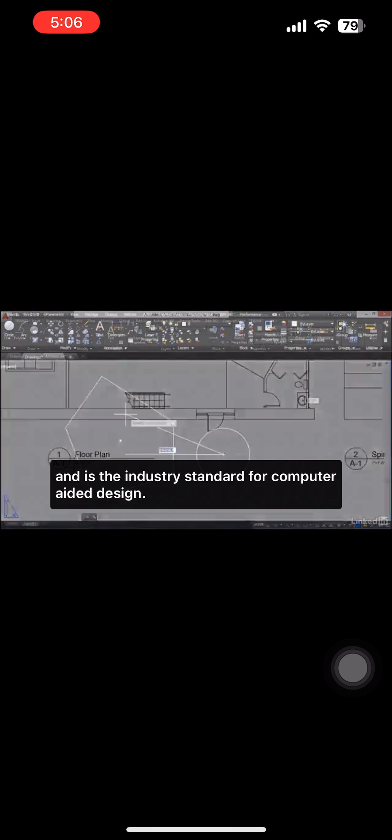AutoCAD has been around for over 30 years and is the industry standard for computer-aided design. People use AutoCAD in many different professions and disciplines.

In this course, we will start at the beginning, drawing lines, rectangles, circles, and other geometric objects. We will then learn many tools to manipulate these objects and control their visibility. You will gain experience in practice projects. You'll add to your knowledge step by step with topics such as hatching, dimensioning, annotation, attributes, tables, external references, layouts, and creating output. We'll cover all of these tools and more. So let's get started with AutoCAD 2016 Essential Training.

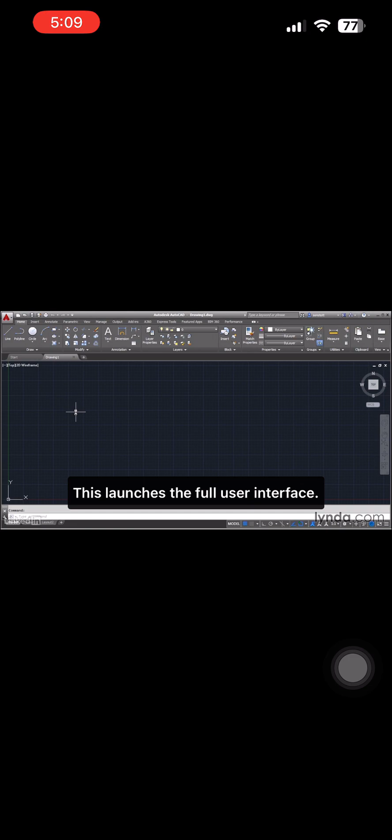At the top, we have what is called the Application menu. Click to open, and move the cursor over these items without clicking. You'll see that they automatically change, and you have items you can choose over here on the right.

There's a search bar up here where you can type in command names. So for example, let's say you've heard of the command fillet, but you don't know where it is in the interface. This will give you information about where to find it. There are actually two different versions of fillet: one's a 2D version, and there's a 3D version down here.

So for example, let's say I want to find this command in the interface. It's on Ribbon tab Home, the Modify panel, and it's in a chamfer and fillet dropdown. Let's see if we can find that. This is the Ribbon tab Home, this is the Modify panel, and this is the fillet and chamfer dropdown.

If you hold the cursor over a command, you'll see its tooltip, which gives you more information. Some panels can be expanded like this one, shown with a downward facing arrow. That means there are more commands available, each one with its own tooltip. There are many tabs on the ribbon, and some of them have drop downs, and you can just go through here and examine how some of the content is organized.

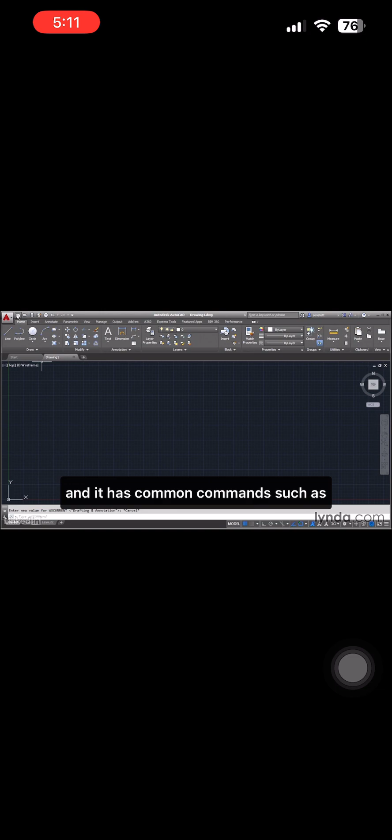Continuing on with our tour, this top area is called the Quick Access toolbar, and it has common commands such as new, open, save, save as, plot, undo, and redo. You can add or subtract items from this menu using this drop-down. Say I want to add workspace to the list.

That will give me this drop-down menu, which allows me to change workspaces up here as well. Here you can type in command names or phrases to search for them in AutoCAD's help system. Over here, this shows my user account on A360.

This is how you can access apps that work within AutoCAD to extend the functionality of the program. Over here, you can access Autodesk's online community, and this is a link to the help system.

Of course, over here we have the standard Windows controls for the entire application and a corresponding set of Windows controls for the current drawing. This whole area is called the drawing window.

This element is called the view cube, and it helps you navigate in three-dimensional space. The navigation bar contains a list of common navigation commands that are used both in 2D and in 3D work.

These are the in-canvas controls, and they're actually menus. You can open them just by clicking on the word.

You can also right-click to open the context menu, and the information displayed in this menu depends upon the context in which you are clicking. So if I right-click up here, I'm going to get a different menu. If I right-click here, I'm going to get a different menu. You see? It's context sensitive.

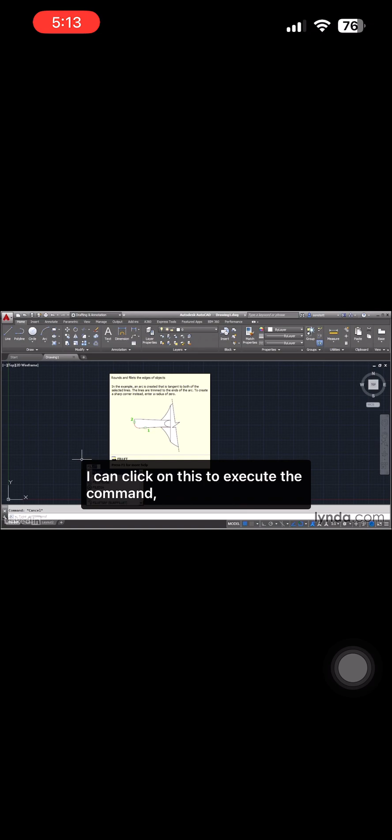I can click on this to execute the command, and now it's running on the command line. You see the prompt here and some options. I don't want to dive in too far in this first video, so let's cancel out by pressing escape.

Down here we have model and layout tabs. I'll click on layout 1 to go to this virtual sheet of paper, which is where I would lay out the drawing for plotting. You can also hover the cursor over the File tab to go to the different layouts or to go back to model space.

Alternatively, you can just click these tabs down below. They do the same thing.

Finally, over here in the lower right of the interface, you'll find the status bar toggles. They're on when they're blue and off when they're gray. And each status bar toggle has its own menu.

You can access that by right-clicking. This goes to a dialog box. This one opens up a menu instead. Each one is different. You can also add or subtract items from this menu by using this rightmost button called Customization.

Here you can add, let's say, line weight, and you see that when I toggle that on and off, it's adding this element right here that allows me to show or hide the line weight. I'll just turn that off again.

This completes our tour of AutoCAD 2016's user interface.

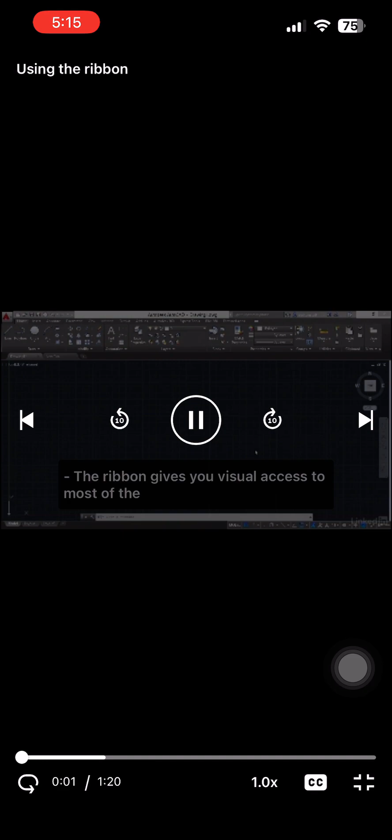The ribbon gives you visual access to most of the commands used in AutoCAD. In this video, you'll see how to customize its appearance using the ribbon's 3 modes. So the ribbon is organized into tabs, panels, and commands.

You can display this information in different ways using this control right here. Click on it one time, and you will change the panels into these icons. You can go to another tab, and then hold the cursor over the draw icon, and you'll see all of the commands on its panel appear right here.

If I click this button again, we'll minimize to panel titles. So this saves room on the screen. I can then position the cursor over the word draw, and I see that same panel.

I'll click on it one more time, and we'll go to the most minimalistic view where we simply see the tabs. I'll click on the tab, and that opens the full ribbon temporarily, so I could select a tool, click on line, and start drawing a line. But when I do that, the interface disappears.

Click on it one more time to cycle back to the full ribbon, and that keeps the ribbon on screen all the time. And that's the way I'm going to be working in this course. In the next video, you'll learn about changing workspaces.

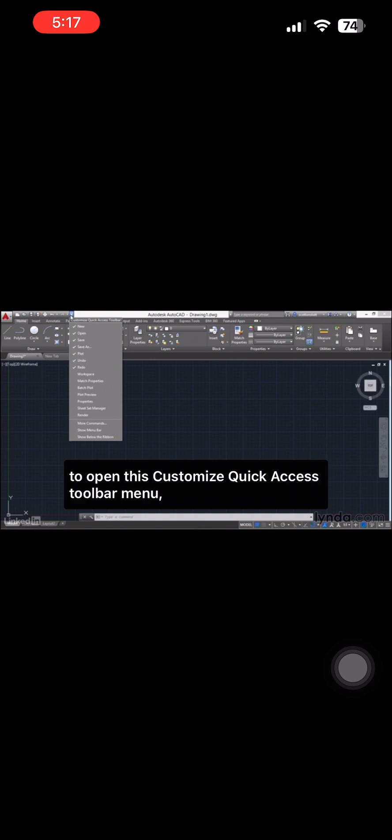Click this downward-facing arrow to open the Customize Quick Access toolbar menu, and then choose Workspace. This adds a new drop-down to the toolbar. I can then open it and select 3D Basics.

This changes the content of the ribbon. It gives me a few 3D modeling tools here on the Create panel, and some Boolean tools on the Edit panel. I still have some of the drawing tools available here and modification tools here, and those were available in the original workspace. But things are rearranged here according to the task at hand. So if I want to do a little 3D modeling, I might just switch to this workspace. It's not necessary, but it makes things a little quicker and easier to find.

AutoCAD is fundamentally based on commands. So if you remember the command name, you can type it in. But if you've forgotten the name or remember it by its icon, you can find it visually in the ribbon.

Another way of accessing workspaces is down here on the Customization button. Click that on the status bar and choose Workspace Switching if it's not already selected. Then click this gear icon to open a pop-up. Here are those same three workspaces that ship with AutoCAD. I'll click Drafting and Annotation to switch back here, and the Design Feed palette opens up.

I'm going to close that by clicking its X icon right here. Now, every time I switch back to this workspace, that palette is going to appear because it's saved in the workspace itself. I'd like to turn that off on a more permanent basis and only call for it when I need it. And to do that, I'm going to open up the Workspace menu and select Workspace Settings.

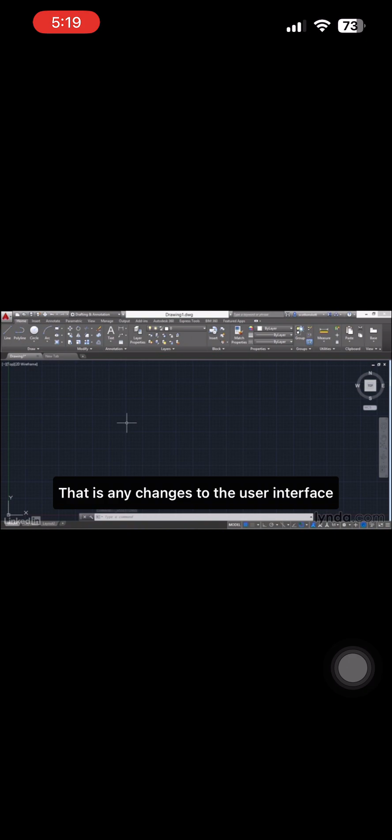Here you have the option of whether or not you want to save changes to your workspaces. You have to choose this radio button if you want to save the changes and click OK. Just be warned that anything you do now is going to be recorded in that workspace. That is, any changes to the user interface will be saved in the workspace.

So if I now switch to 3D Basics and then switch back to Drafting and Annotation, that will leave the Design Feed palette closed. It doesn't reopen it like it did initially.

Now let's say I want to pull up that palette. I can just type it in. I'll start typing Design Feed, and as I do that, watch what happens. DES, and autocomplete narrows down the commands that are available as you go ahead and type. So I want to reopen that by using Design Feed Open. I'll just press Enter now, and sure enough, that opens the palette.

I can close it with a close box. You can also go to the View tab, which is present in every workspace, and here you can toggle on various user interface elements or turn them off. I'll toggle off the navigation bar, the view cube, and the UCS icon. I'll also toggle off the layout tabs because the same functionality is available on the file tabs here. Just by holding the cursor still over a file tab, you have access to model and the layouts.

This is just my personal preference on how I like to have my workspace cleaned up so I don't have extra user interface elements on the screen. But as you can see, AutoCAD is highly customizable, so you can adapt it to the way that you like to work and the types of things that you're doing. In the next video, I'll show you how to get into the nuts and bolts of how to customize AutoCAD's user interface.

In this video, we will relocate a command on a panel to get a sense of how far you can take customizing the user interface. In the Drafting and Annotation workspace, go to the Home tab and then click on the word Draw here to open this slide out. This reveals additional tools.

This command right here is multiple points, and the command that you would type on the command line is shown at the bottom of this tooltip. It's point. I'd like that command to appear to the left of the line command here in a large icon form. Let's take a look at that.

Type in CUI for Customize the User Interface and press Enter. That opens up this large, potentially intimidating dialog, but I'm just going to give you a quick tour of this and just give you a sense of what's possible.

I'll go into the ribbon here in the hierarchical tree and open up Panels and scroll down and locate Home 2D Draw. Open that and then open up row 1 and row 2. So we have this listing which corresponds to what we see over here.

I want to move multiple points up into row 1. So basically I want to move this command over here. So I do that by dragging this up in this hierarchy and dropping it right above the line command, right there. And now the icon appears in a new location.

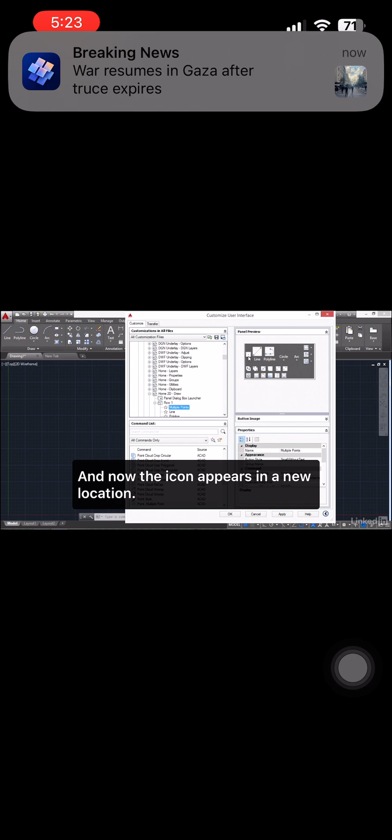However, it's too small. So we can change its property right here. The button style, I'll open this up and choose large with text vertical. And there we have it. Now it says multiple points. However, multiple points kind of takes up too much space.

So I'm going to remove the word multiple and just say points. And then I'll click Apply and OK. And in a few moments, the change will take effect. There we have it. Now it says points and line. So we've successfully customized the user interface.

So I don't really recommend that you go changing everything right in the beginning, but I just want to give you a taste of what's possible and how you can customize AutoCAD to suit just about any purpose that you have to use the software. In the next video, I'll show you how to edit command aliases.

Most commonly used commands have command aliases or abbreviations you can use on the keyboard. For example, you can type REC instead of the full word rectangle to save time typing. In this video, you will edit a command alias using the alias editor built into AutoCAD.

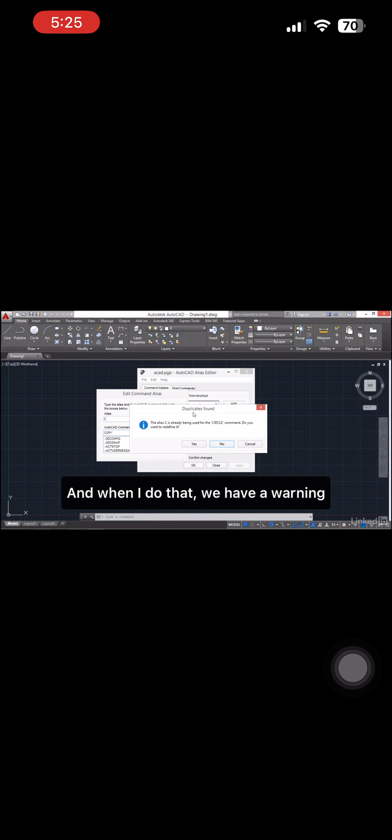OK. And when I do that, we have a warning because there's a duplicate. The alias C is already being used for the circle command. Do I want to redefine it? In this case, yes, because I copy things more than I draw circles. So when I do draw a circle, I don't mind typing CI. So I'll say yes. The alias C now refers to copy.

Great. Let's go back in the alias editor one more time. So I'll just press Enter to repeat the previous command. And that just brings it right back up. And then I'm going to scroll down this list until I find circle. And right now it's also C, which is potentially a source of a problem. So I'm going to edit that and make that say CI so we don't have a conflict.

OK. And then I'll click Apply. I'm going to overwrite this file, and you can see where it's located here in this long path. And alternatively, you can edit that file using Notepad or some other text editor. Just make sure you don't save it with any formatting. It's just a simple text file. I'll say OK and OK again.

Lots of OKs here. And I've experienced this a few times where AutoCAD thinks that it's crashed. You just cancel this. It's actually fine. Now I'm going to type C, and it says circle. Seemingly didn't work, but I think what we need to do is close out of the application and relaunch it. And then our aliases will take effect.

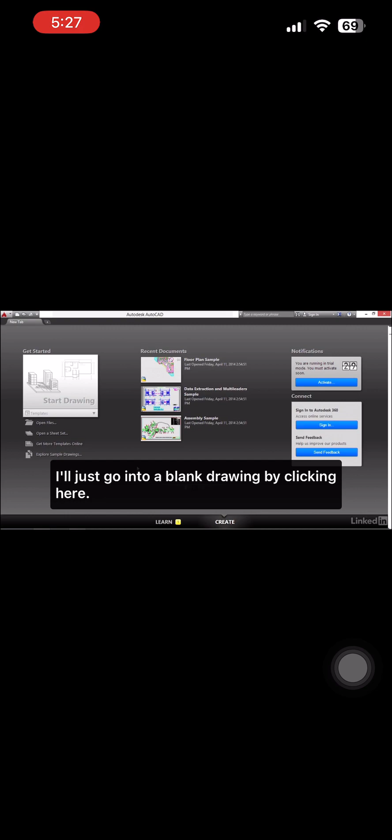Okay, I've relaunched AutoCAD. I'll just go into a blank drawing by clicking here. And then I will type C and see how the autocomplete now says C is copy. Also, CI is circle. So you can use this method of using alias edit to change the abbreviations you use for your most frequently accessed commands.

In this video, I'll show you how to access help, which is built into AutoCAD. The great thing about help is you can get lots of specific information, but the problem is you have to kind of know what you need to find out, and that can be a problem.

So if you know the command that you are having trouble with, then you can look it up. But if you're not sure what command to use, then that's another story. So right up here, there's a search engine that you can use to query AutoCAD's built-in help system.

So if I want to type in the word circle and then press enter, it will automatically open the page about circles. And you can then go to the circle command itself and read about its prompts and so on. This is really most useful when you want to look up a specific piece of information about an option that you just aren't quite understanding. But again, it's really only very limited in its usefulness because you have to know exactly what you're looking for.

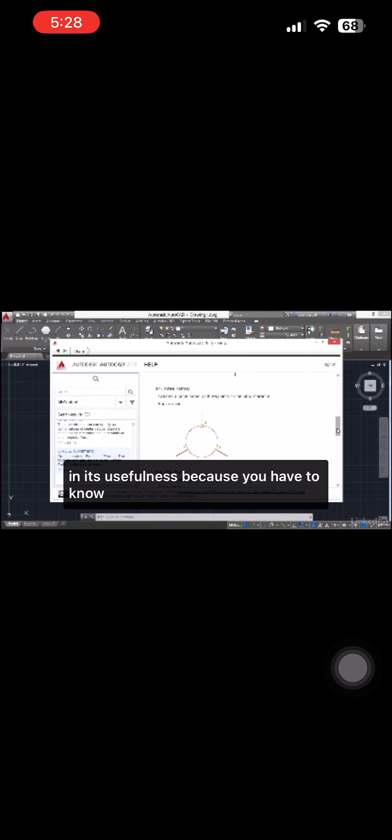You can also get there just by typing the question mark. It's its own command, question mark, enter. It opens the help just the same. You can also, if you do it this way, filter the results so that you can get content just for a user, or if you're writing your own programs, you can get information for developers. So I just want to know how to use the rectangle command, and I can type that in here

and get some information. In this video, you accessed product documentation and are able to access videos that ship with AutoCAD through this help system.

In this video, I'll show you a few tricks for saving, backing up, and recovering damaged files. Let's go ahead and open a few files to get started here. Go up to the Open icon on the Quick Access toolbar and navigate to the Chapter 2 folder. Let's open Plumbing, Mechanical, and the Architectural Imperial Units drawing file. So to select them, I'm going to hold down the Control key and select those three items. Click Open, and they will appear here on different file tabs. You can take a look.

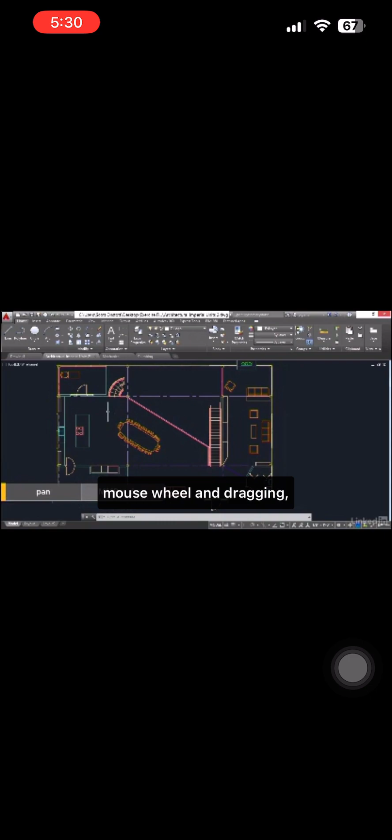Now, if I make another change, say I pan the drawing by holding down the mouse wheel and dragging, you'll see that a little asterisk appears after the file name to indicate that the file has changed. You could now save it. I could either click this icon up here to do that, or type QSave, or the keyboard shortcut QS. Also, you can press Control-S, so there's many different ways to do this. My favorite is just to type QS and press the spacebar with my thumb. That seems to be the fastest for me.

AutoCAD will also automatically save the file after a few minutes, and you can control how long that is in the options. So let's go to the Application menu and click on Options and take a look at that. Under Open and Save, right down here, you can choose to automatically save a copy of your drawing every 10 minutes or however many minutes you want. I find this to be a little bit disruptive because I can be working and then all of a sudden AutoCAD will pause for a second while it's saving a large file. I find this to be a little bit annoying, so I usually turn this off. But alternatively, you could increase the save interval to something like every half an hour, and maybe it wouldn't get in your way as much.

You can also optionally create a backup copy of every file, and I have that on. So let me show you what happens when I save this. I'm going to press Control-S to save, and I'll go over to the Windows Explorer, take a look at the file system here, and see what's happened on disk. So I have a new file, Architectural Imperial Units 2, that was created when I used Save As. And then the backup file was generated when I just typed QS.

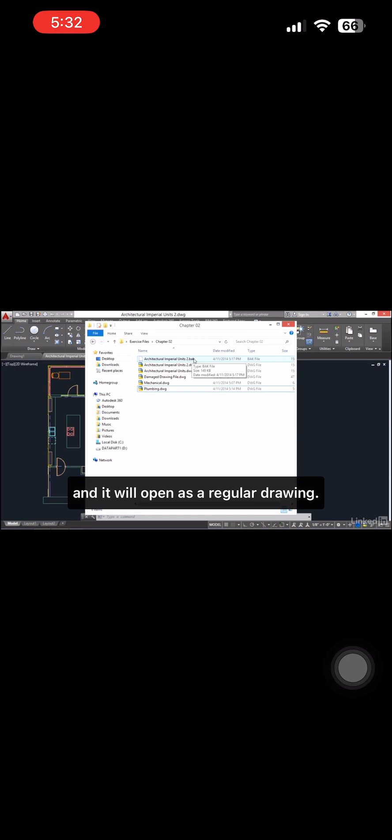If you need to use this file, let's say this one gets corrupted or deleted, you just have to rename the file extension to DWG, and it will open as a regular drawing. This can be handy because you're doubly protected, but it takes up twice as much space on disk. So for that reason, I tend not to use this method. So if you don't want to automatically create a backup, you can go back to Options, and you can do that quickly by typing OP, Enter, and just turn off the backup file creation and the autosave feature.

Of course, then you're running the risk of losing everything, but we still have yet another form of backup available to us through Autodesk 360. But that's only available if you sign in up here to the service. And then every time you save, a copy will be uploaded to the cloud.

In some cases, you might need to recover a damaged drawing. There's a special command for that called recover. I'm going to type that in. Recover, enter, and I will select this damaged drawing file, open. It's taking a while to think about this and to analyze all of the objects in the drawing. And now it's found 2 errors. Who knows what they were, but thankfully they were fixed. So I can say close.

If you experience some strange behavior in the program where a line, you know it exists, but it doesn't show up, for example, you can try recovering the file, and it might correct any error. Now this is rare. This only happens in big project files that take a lot of memory. So I just want to point this out so you have another technique to save your data. In the next video, you'll learn how to set the drawing units.

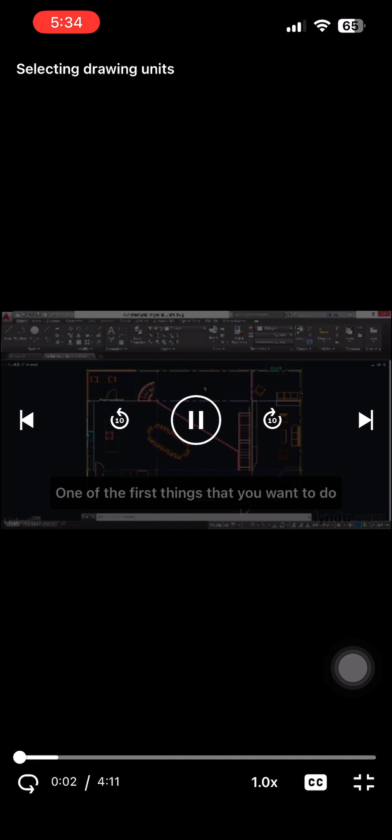In this video, I'll discuss units. One of the first things that you want to do before you get started drawing is select a system of units. Open the Architectural Imperial Units sample file from the Chapter 2 folder, and then type UN, enter for units. This drawing is currently set to architectural, which means the foot and inch system. The symbol of inches is the double quote here. The symbol for feet is this single quote. They're both on the same key next to the Enter key on the keyboard.

You don't actually have to ever type in the inch symbol because AutoCAD is going to interpret a number like 18 as 18 inches. You could alternatively enter that as 1 foot 6. That's one single quote 6, and AutoCAD will interpret that as 18 inches, just the same. You also have these other choices for units. So let's say I was using the metric system. I would select decimal units in that case. Engineering units are actually based on feet and inches, but they use decimals. So if I wanted to say 18 inches in engineering units, I would say 1.5 feet.

Fractional units are inches only, no feet, and these are used by cabinet makers, for example. Instead of saying 5 feet, they would just say 60. Scientific units have exponential notation, and these can be in any type of unit that you want. It could be parsecs for astronomers or angstroms for circuit designers or something. You just type E to indicate powers of 10.

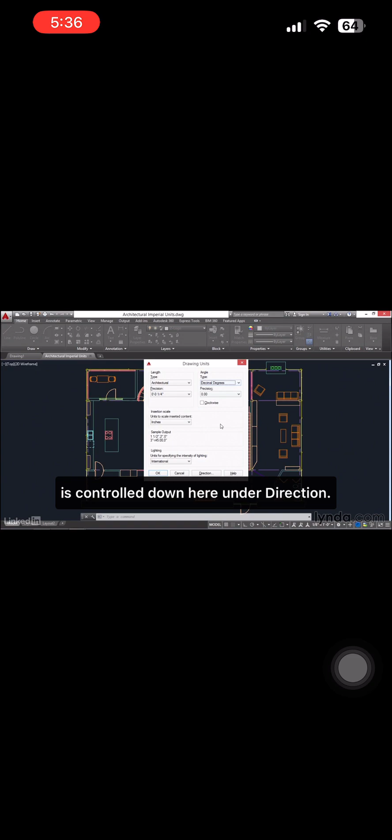The way that you measure angles is controlled down here under direction. The default in AutoCAD is east is 0 degrees. So going to the right is 0 degrees. Going straight up then would be 90 degrees. So the system works in a counterclockwise fashion by default. You could change that so that north was the base angle, and then 0 degrees would be straight up. And that's typically the direction that you want for surveyor's units. I'll leave this set to east. Again, you can set the precision for the angular measure, and you can check here if you want it to go the other way so that angles are measured clockwise rather than counterclockwise.

When you create blocks, you have to choose what units they're using. So here's where you can select which units you want blocks to be converted into. So because I'm using architectural units, it makes sense to leave this as inches. If I was using decimal units, I could then change this to be centimeters or millimeters. Down here, you have choices for lighting, international, American, or generic. I'll go with American, inches, and architectural.

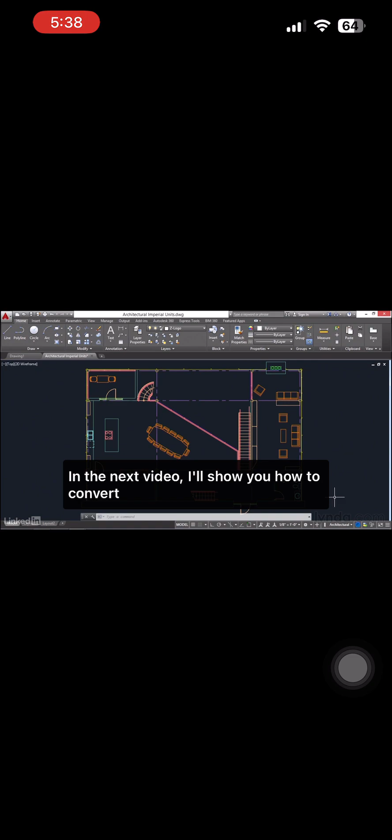Down here on the status bar, you have the ability to add units as a special choice. However, it only lets you select one of these 5 systems. It doesn't give you any other choices. So I really don't recommend that you do it this way, because then you can't control the precision or the angular units or anything else. In the next video, I'll show you how to convert a drawing from one system of units to another.

In this video, I'll show you how to convert a drawing from one system of units to another. We will convert from feet and inches to centimeters and back again. Go ahead and open the Architectural Imperial Units sample file from the Chapter 2 folder.

Before we change anything, I'd like to measure a distance in the plan. And I need to measure something that I already know the distance of. So I could measure, let's say, this sofa here. It's probably about 8 feet long or so. Let's just verify that by using this tool, Measure. I'll click on this icon,

and then I'll click near the sofa, right about here and right about here. And you can see interactively the distance there. It's actually close to 6 feet. So let's just keep that in mind. I'll press Escape to cancel out of that command.

Now I'm going to change the units. So I'll type UN, enter, and change the type from architectural to decimal. And then I'll set the precision to be 0.0. Also, when you're changing units, it makes sense to change the insertion scale, but this is different than the drawing units. This is the scale that you're going to insert blocks at, and we'll learn about blocks later, but this is different than the drawing units.

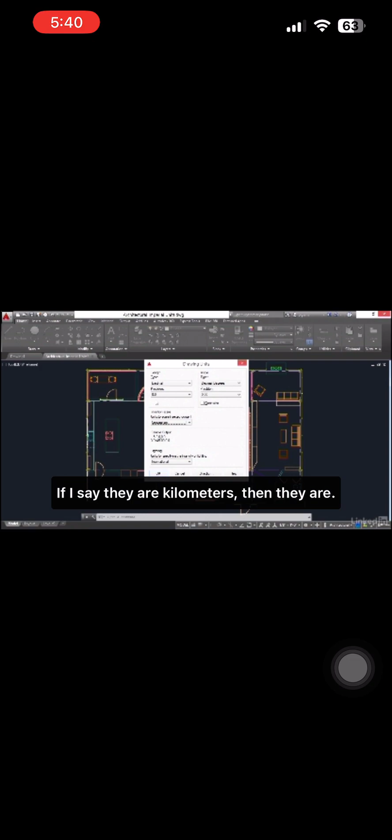The units are really what you say they are in your mind. So if I say these are millimeters, then they are. If I say they are kilometers, then they are. It really depends on what you're drawing. So in this case, because it's architecture, I'm going to say that 1 unit is 1 centimeter. I'll click OK. And the units have changed, but the drawing has not.

Let's go ahead and measure that again. And I'll click 2 points about here and here. And it looks like it's about 72 units. So that would be 72 inches, really, because that's 6 feet. So the drawing still has another missing piece, and that is the scale. So it's really not enough just to change the units. You also have to scale the drawing to really convert it from one system of units to the other.

So to do that, I'm going to use the scale command, which is located right here on the Modify panel. I'll click that icon, and now it says Select Objects. Just as a shortcut, I'm going to type all, A-L-L, enter. It gets everything for sure. And it still says select objects because I can keep selecting more things, but I'm just going to go ahead and press enter again to get out of that mode.

Now it says specify base point. You can see that by the cursor and also down here on the command line. The base point should be at the origin point of the coordinate system, which is 0, 0, 0 in x and 0 in y. So I'll type 0, press the tab key to go over to the y coordinate and press 0 again, and then enter.

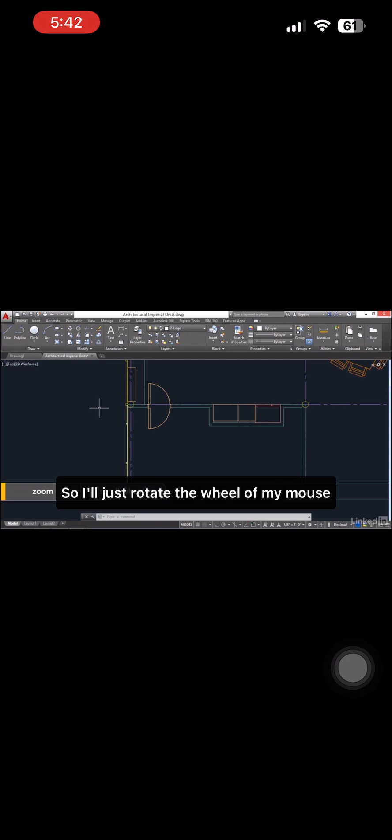So I'll just rotate the wheel of my mouse, and then I will drag the wheel to pan, like that. And again, I'm going to measure this sofa over here. Now it's about 180 something, so it's much bigger, and that makes sense for centimeters. It's almost 2 meters long now. So this is like a reality check I always like to do. Does it make sense? Yes, it does. Okay, it looks like I've successfully converted the units.

Okay, now let's say we want to go back. We're starting with this metric drawing, and we want to go back to imperial. So again, we have to change the units to the values they were before, architectural and inches here. Okay. And now I need to scale it in reverse. So how do you do that? It's a little bit more complicated, but not much.

Again, you do scale, select objects, we'll type all, enter, and then enter again to get out of select mode. And then the base point, I'll type 0, tab, 0, enter. The scale factor, this time, I don't know. I don't have a calculator to calculate 1 divided by 2.54, but I'm sitting in front of a computer that has that function built into it. So I can ask AutoCAD to figure that out for me.

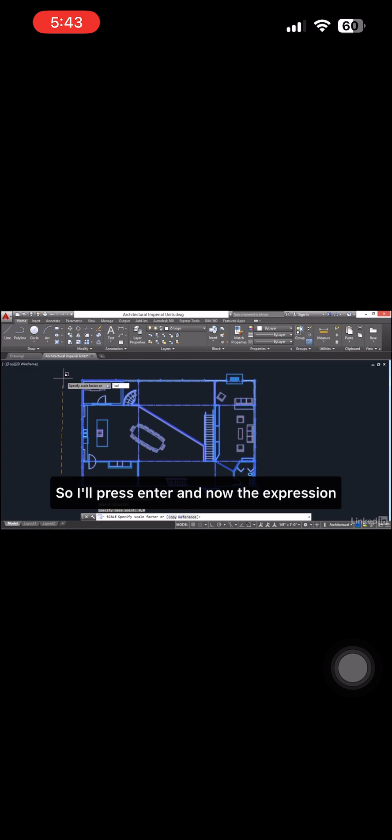So to do that, I'm going to type apostrophe CAL. That means use a calculator transparently on top of this command. So I'll press enter. And now the expression is going to be 1/2.54. That means 1 divided by 2.54. That's my conversion factor. I'll press enter, and everything got smaller.

Let's just go ahead and verify the size of that sofa now. I'll use the measure command again. I'll click 2 points here, and it looks like it's about 6 feet. So we did it correctly. So there you have it. The way to convert a drawing from one system of units to another involves more than the units command. You also must scale the drawing.

In this video, I'll discuss some program options and their scope. To understand what I mean, let's just dive right in. Open the mechanical sample file in the Chapter 2 folder and type OP Enter for options. Go to the Display tab here. Let's change an option that has global scope, that is, an option that affects the program as a whole. I'll change the color scheme from dark to light and click OK.

This option remains active no matter which drawing you're in. Go ahead and open the plumbing sample file in the Chapter 2 folder. Sure enough, the interface remains light. I can go back into options and change that back to dark. I actually prefer dark because it gives you less eye strain.

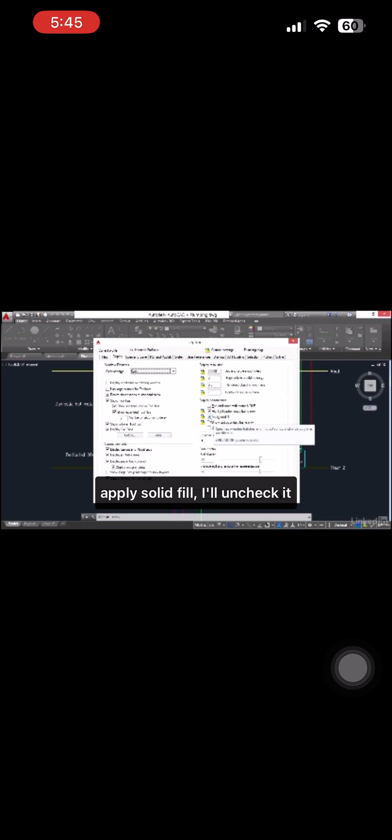I'll click apply. Now, some of the options have this symbol next to them, and it means the current drawing. So if I change this option, for example, apply solid fill, I'll uncheck it, and that's going to be specific to the drawing. That means it has drawing scope. I'll click OK. And in this case, this particular option is visible after we regenerate the drawing database.

And so we just type in RE for regen and press enter. And when everything is regenerated or recalculated, if you will, the fill inside these plumbing objects disappears. This option is specific to this drawing. If I go over to the mechanical drawing, I can go ahead and check out the options again, and you'll see that yes, this is selected here. So it's specific to the drawing.

So you have two flavors of options, the options that affect the whole program and the ones that affect specific drawings. And you can tell them apart simply by using that icon in the options dialog box. In the next video, you'll learn about drawing templates and how you can use them to create new drawings.

In this video, I'll show you how to create a template so that you can pass along drawing-specific settings into future drawings that you create. Go ahead and click New, and you're prompted to select a template file. Select the standard acad.dwt file. T is for template. Incidentally, this folder is located deeply in the hierarchy of the user profile. I'm going to open this particular template, and that creates a new drawing, drawing 6.

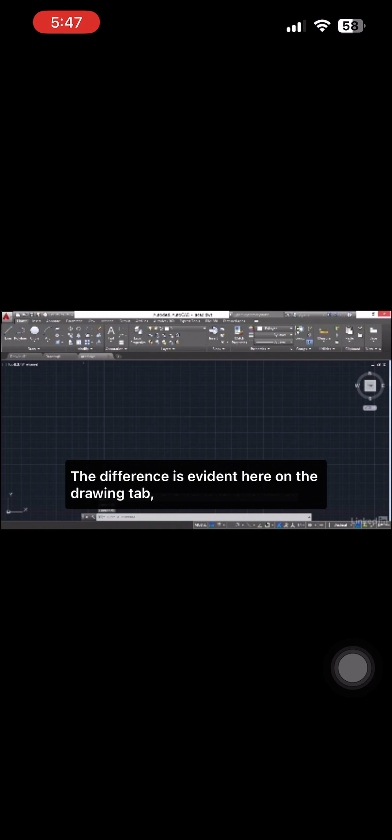If we want to alter the template, we have to access it in a different way. We'll go to Open, and then choose Files of Type DWT from this drop-down. That takes us to that same folder where we can open that template file. The difference is evident here on the Drawing tab. We see ACAD DWT, and the previous one said Drawing 6. So now we know that we're actually in the template.

Let's go ahead and turn off the grid and toggle off the UCS icon by going to the View tab of the ribbon. I would also like to turn off the View cube and go to the Home tab. And just so that you really understand how templates work, I'm going to create a circle right here in the middle of this space. I'm doing that just to demonstrate this point, but you normally wouldn't create a circle in your template. This is just to show you that this information is passed on to the next drawing.

Let's go ahead and save this with a unique name. So click Save As and rename this mytemplate.dwt. Save, and you can type in an optional description here.

No grid, no UCS icon. Okay, so we've saved the template, let's go ahead and close it. Now let's create a new drawing using the template.

Click New, select My Template, and click OK. Open. Drawing 7 was created with the circle. Notice that there's no grid and no UCS icon.

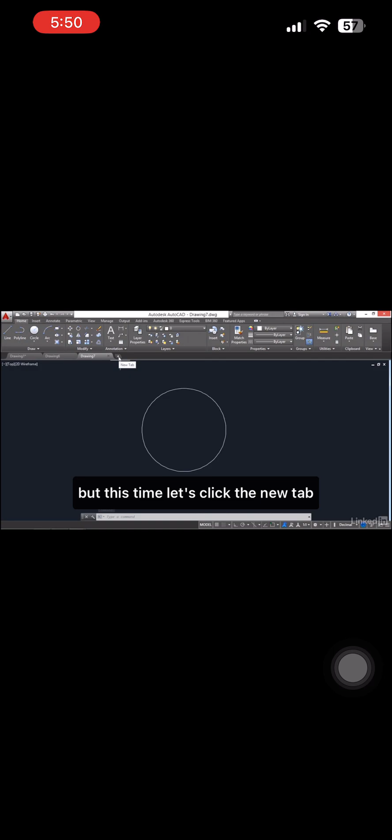Just to test it out, we will create a new drawing, but this time let's click the New tab, and we can access the template in an alternative way right here by expanding the templates area, scrolling down, and choosing mytemplate.dwt. It created a new drawing called Drawing 8 that has those specific settings set up so that now you're ready to create a new drawing. So in this video, you learned the ins and outs of templates, and you created your own template.

In this video, you will pan to change your point of view in a drawing. Open the architectural sample file in the Chapter 3 folder to begin. Pan is perhaps the simplest of all commands.

It doesn't have any options. I'll show you the formal method of using this command first, and then I'll show you a shortcut, which I prefer. So the pan command can be executed simply by typing P, enter. The cursor changes to this hand symbol. Click and hold the left mouse button and drag to pan.

When you're panning, what's happening is you're changing your point of view, you're not actually moving the geometry in space. It's an important distinction. If you wanted to move geometry in space, you would use the move command. Here we're transforming the entire drawing, if you will, because we're actually moving our camera that we're viewing the drawing through. So I'm just panning, looking at different things.

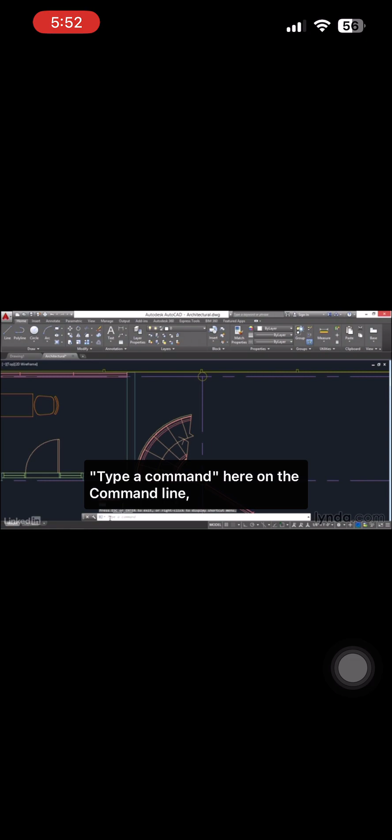It's very intuitive. Notice down here, right above the command line, it says press escape or enter to exit, or right-click to display shortcut menu. So there's 3 options listed here of how you can get out of the command. Escape is the universal way to cancel out of any command, so you just press escape and the command is done. You know it's done because it says type a command here on the command line. You're ready to do something different.

I actually want to go right back into the pan command. This time, instead of typing P enter, I'm just going to press the space bar. The space bar works just like enter, and you can do this with any command. You can just repeat the previously issued command by pressing the space bar or enter. So it goes right back into the pan command.

This time I can pan again. Maybe I'll go over here, check out what's over here. And I want to end the command again. This time I'll press the space bar. The command is done. Let's go and try it again. I'll press enter to repeat the previously used command. I can pan again. I'll go down here.

And this time, I will use this last option, right-click to display shortcut menu. I'll right-click, and I see that I can switch to some other navigation commands, such as zoom, 3D orbit, or some of the zoom options, zoom window, and so on. In this case, I'm just going to exit, so I'm going to click on that option in the context menu, and the command is done. So there are many ways you've seen there to use the formal pan command.

There's still another pan command, which is the older pan command, and you can access that by pressing -PAN. All of the older commands generally are still in AutoCAD, so this is great. If you learned it a long time ago, you can still use your methods. And this is also useful because some of the older commands have different options and some have advantages that you don't have in the latest command.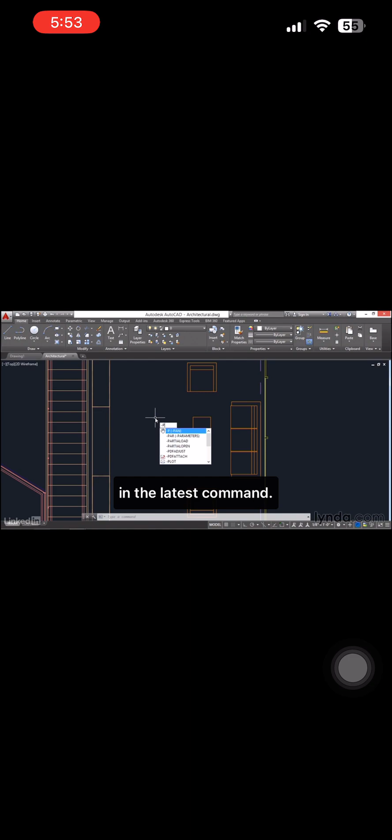So here we have -P for the original pan command, and it asks you to specify a base point or displacement. Basically, you need to click 2 points so that you can slide the drawing over from point A to point B. So I'm going to click a point for point A, and then I'll click another point over here for point B, and the drawing is slid over that far.

That's a little bit harder to use, I think, than simply dragging. I just wanted to show you, though, that all of the older commands are there if you preface the command with a dash.

Now you can kind of forget all of that, because my preferred way of panning is simply to drag the mouse wheel. Just hold down the mouse wheel and you'll see that the cursor changes to the closed hand symbol, and then move the cursor.

This way it's kind of a shortcut and it doesn't issue a command. You don't see anything change down here on the command line, and it works transparently on top of any other command that you may be in.

For example, I could be drawing a circle. I'll just click on circle, then click a center point here, and then I realize, oh, I actually want to make a really big circle and I don't have room for that. So I'm going to drag the mouse wheel over here, and I can pan while I'm doing something else. This is called a transparent use of a command, because it's working in the background, if you will.

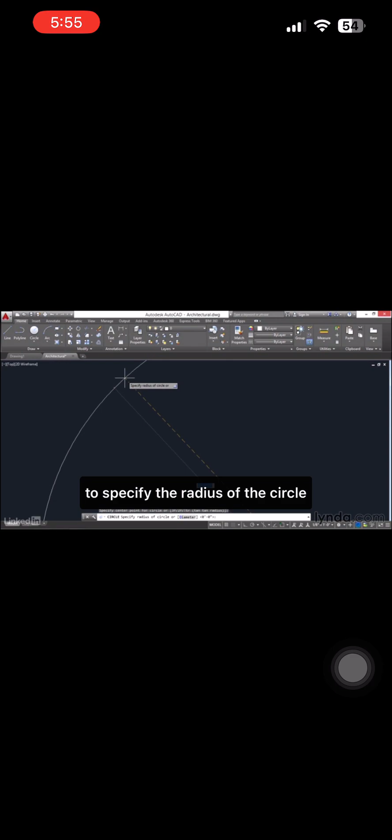So I can click right here to specify the radius of the circle, and the circle command is complete. And I can pan down here and see some of that circle.

Now there's even one last way I can think of to pan in a drawing, and that is to use the scroll bars. They're off by default here, but I'll show that to you also. Type OP for options, enter, and then right here on the display tab, the first option, it's a checkbox, is to display the scroll bars.

If we do that, we have a scroll bar over here on the side that you can use to pan. Now this is a really inefficient way to get around, I have to say, so I don't favor it.

There you go. That gives you the sense of how AutoCAD works. There's so many different ways to do the same task, and you just have to kind of navigate through all these methods and find the one that works best for you. For me, it's simply to drag the mouse wheel to pan the drawing.

So in this video, we explored not only the pan command and its variations, but we got a little bit more familiar with how AutoCAD works with commands, and how you can cancel commands and repeat commands using the Enter key or the space bar.

In this video, I'll discuss the zoom command and many of its options. AutoCAD has the capacity to zoom in indefinitely without a loss of quality.

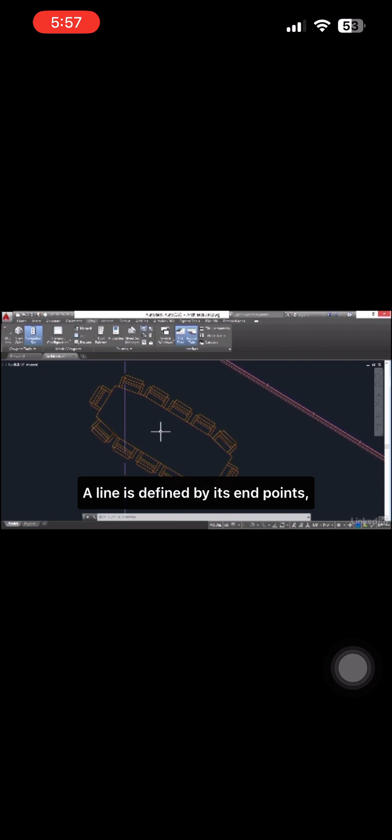That's because AutoCAD is a vector program, and it's fundamentally based on math. The math is what's behind these objects. A line is defined by its endpoints, and that means you can zoom in basically infinitely. You can keep going in or out, and that's why AutoCAD can be used for astrophysics all the way down to circuit design, very small things.

Let's go ahead and open the architectural drawing in the Chapter 3 folder, and go ahead and pan around the drawing by dragging the mouse wheel.

My favorite method of zooming is to rotate the mouse wheel. I'm going to rotate the mouse wheel and zoom in. But notice what happens, I'm sort of getting lost in space. Everything is black. I'll zoom back out.

With this method, the position of the cursor on the screen matters. If I put the cursor over the kitchen sink and rotate the mouse wheel, I'll zoom into the sink. If I zoom out here and reposition the cursor over this range, I can then zoom into that. It works dynamically, so where you put the mouse determines the center of the zoom operation.

I'd like you to zoom in here in this lower left-hand corner of this range. Just keep zooming in.

Eventually you'll find this tiny little object I put in here, just to show you that we can get really close into this object and ultimately run into a wall. See, I can zoom in and then I seem to stop here. This seems to contradict what I said earlier, that we can zoom in indefinitely.

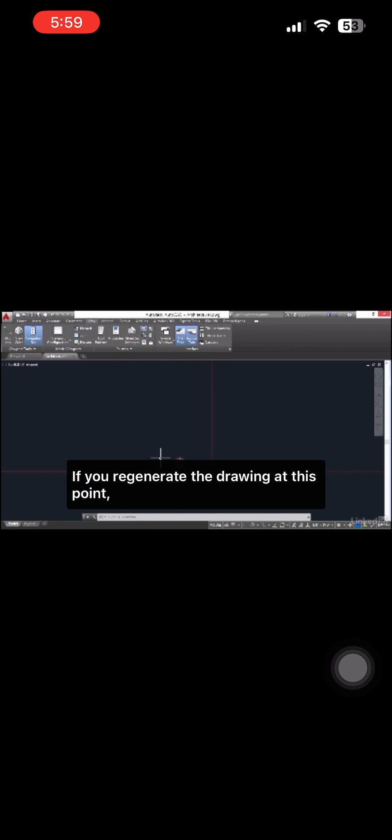We're stuck here until we learn about the regen command. If you regenerate the drawing at this point, you'll recalculate the math behind this representation, and that will allow you to zoom in more. So I'll type RE for regen and press enter. Now the mathematics underlying this geometry have been re-normalized, if you will, and now I can keep zooming in.

By the same token, if I zoom out, I'll run into a wall at some point where I can't go any further. Now I'm kind of stuck here, looking at this detail of the corner of the range. What happened to the whole floor plan? I want to see the whole thing now. Well, I can regenerate at this point again, and then I can keep zooming out.

You can do that indefinitely. I can keep doing that, regen, and zoom out more and more, and I could keep doing this until the entire building was a single pixel on the screen. But I think you get the point. We can zoom in and out as much as we want. And if you run into a block like that, just regenerate, and then you can keep going.

Now, that's my favorite way of zooming, using the mouse wheel. But there's actually the zoom command, which is the more formal way to do it, and it has certain advantages. Let's try it out. Type Z for zoom and press enter.

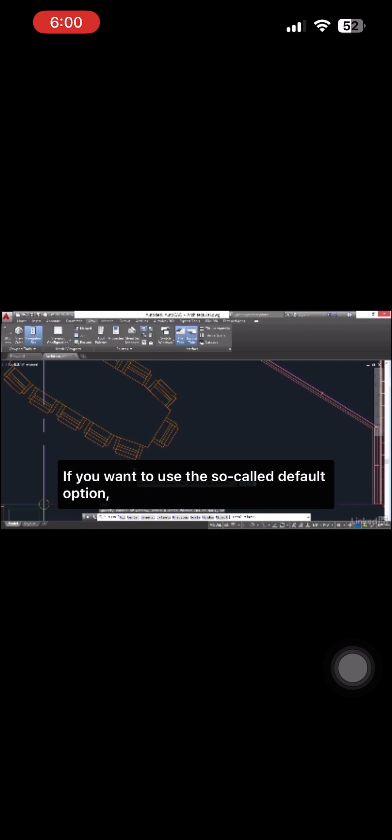Now this command has many different options. They're listed down here on the command line. There's also a default option in angled brackets here, real time, and it's also attached to the cursor, highlighted in blue. If you want to use the so-called default option, you press enter.

Now we're in the real time option. The way this works is you can zoom in by dragging up and zoom out by dragging down. Dragging left or right doesn't do anything. Now, unlike the mouse wheel method, it doesn't matter where the cursor is. I can put the cursor over here and zoom in, and it doesn't zoom into that stair. It's just zooming into the center of the screen.

So I don't prefer this method because you have to then pan by dragging the mouse wheel, and then you can continue. I'll right-click and choose Zoom, and continue using that real-time option. But this takes a little bit more doing. I have to keep switching back and forth between pan and zoom. I'll press Escape to end the command, and then press the spacebar to repeat the zoom command.

Now I'd like to see the entire drawing fit on the screen. The way you do that is with Zoom Extents, and I can click this option right here to execute it. That's Zoom Extents. I see everything in the drawing.

Now another useful zoom option is Zoom Window. I'll type Z, enter, and Zoom Window is actually already running. I get a prompt for this option that says, specify corner of window, or enter a scale factor. So I'd like to zoom in to this chair right here. To do that, I'll specify the corner of a window, simply by clicking in the upper left-hand corner. Then it says specify opposite corner. I'll click down here in the lower right corner of the window, and I zoom in there. So the size of the window that you make determines how much you zoom in.

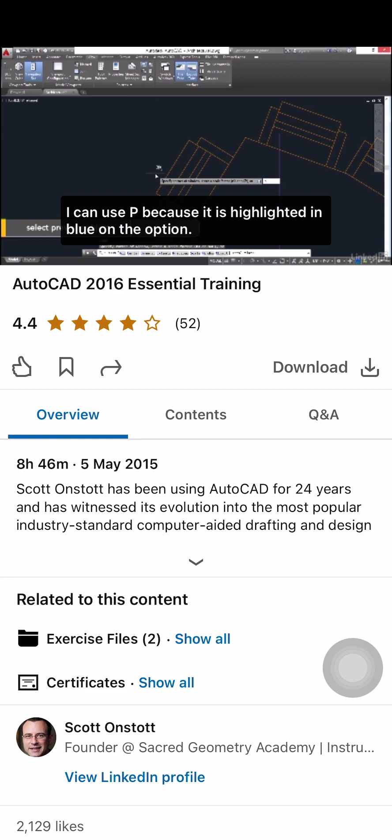Let's go zoom previous. I'll type Z, enter, and P, enter. I can use P because it is highlighted in blue on the option, so P will be equivalent to clicking on this option on the command line.

This time I'll zoom into that tiny object on the range. I'll type Z, enter, and use the window to zoom in really tightly here, by making a very small zoom window. I'll do that again by pressing enter to repeat the command, and then zoom in there like that. And again, this is very small.

Notice I didn't need to regenerate here. It says down here, regenerating model. It does it automatically when you're using the zoom window.

There's a shortcut for using Zoom Extents, and that is to double-click the mouse wheel. Just double-click the mouse wheel and you Zoom Extents. It can be a little tricky because double-clicking the mouse wheel will sometimes also rotate the wheel, and it will jump like it's doing here. But that's a quick way of seeing everything in the drawing all at once, double-clicking the mouse wheel.

The navigation bar can also be used to execute zoom options. You click this little arrow underneath the zoom icon to access this menu of zoom options. I can use Zoom Window, and I'll zoom into this chair.

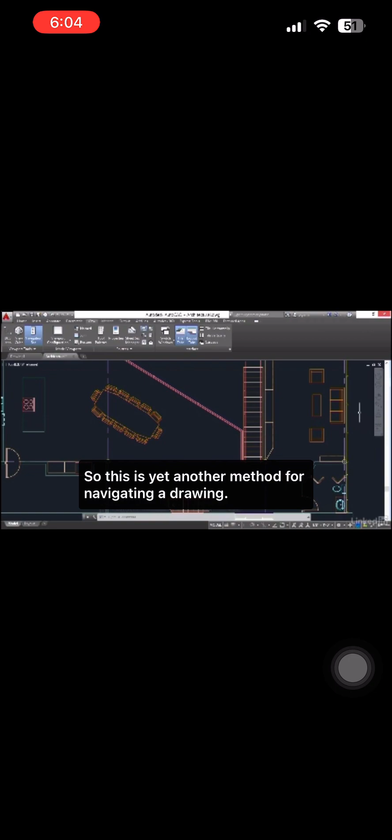And then let's go back to where we were before by using Zoom Previous. I'll select Zoom Previous. So this is yet another method for navigating a drawing. I prefer the mouse wheel approach, but it's good to know the different methods that you have at your command with Zoom. In the next video, you'll learn to navigate model space and paper space.

In this video, you'll learn about the difference between model space and paper space, and how to navigate between model and layout views. Open the architectural sample file in the Chapter 3 folder, and go to the View tab. Let's turn on Layout tabs here. This displays these elements in the lower left-hand corner. Right now we're on the Model tab, and that means that we're in model space. This is the space where you will draw all of the objects that you work on in AutoCAD.

When it comes time to present the design, you create a layout, and this represents a physical piece of paper. Whether or not you're actually going to create a physical output or an electronic form of output doesn't matter. The layout gives you a chance to compose that on a specific sized sheet. We can go there simply by clicking on the Layout tab. So click on Layout 1, and you'll see what we call paper space. This is laid out according to the dimensions of this sheet.

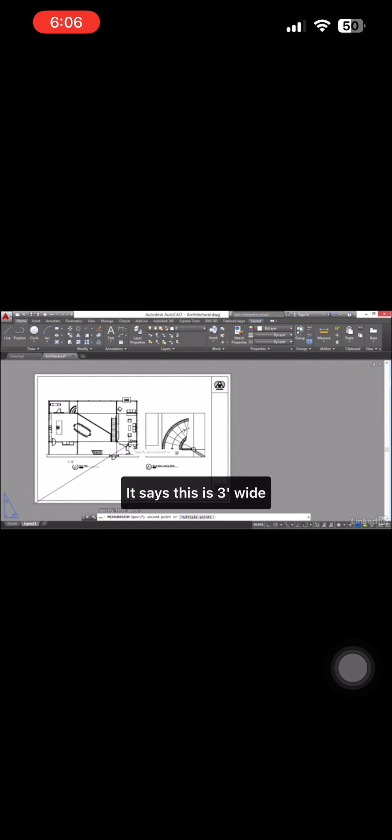Let's go to the Home tab and click the Measure tool here in the Utilities panel. I'll click 2 points roughly on the edges of the paper, right about here and over here. It says this is 3 feet wide by about 2 feet high. So this is a 24 by 36 standard sheet of paper.

Now we're displaying our architectural plans here using a graphic scale. I'm going to zoom in there on this callout here, and it says it's in 1/4 inch scale. That means a 1/4 inch on the paper is equal to 1 foot in the real world. Over here we have a detail of the stair, and that's in 1 inch scale. So 1 inch on the paper is 1 foot in the real world. So everything here on this paper is in paper space. That is, it's measured within 2 by 3 feet.

If I double click on this plan, it opens up the viewport. The viewport is like a window that I'm looking through into model space. So when I'm in here, in this viewport, I can then use the measure command, and I'm going to measure this table, just roughly, from about here down to here. Now it's over 12 feet. So clearly we're measuring a different kind of a space here.

This is the model space. And model space is always in real world scale. That means the objects are the right size that they really are in the real world. It's the viewport that enables you to bridge between the real world and paper space. So I can double click out here on the paper to go back into paper space. And you know you're in paper space when you see this icon here, this triangle symbol. The cursor can also move all the way across the paper when you're in paper space.

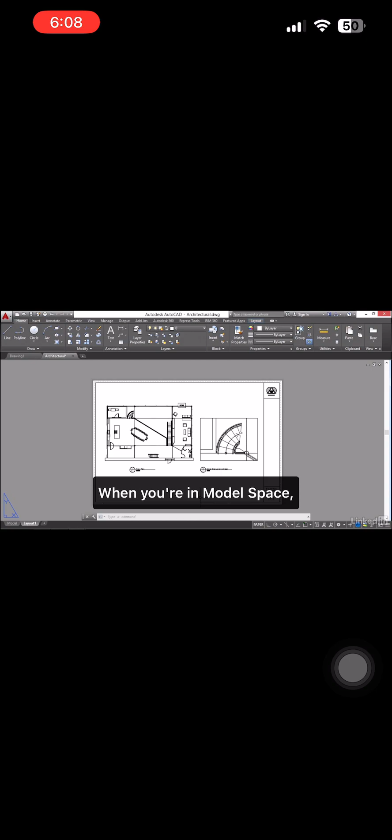When you're in model space, you know it because the cursor is trapped within that viewport. You see? If I click over here on this viewport, I can go into that viewport, but again, the cursor is in there. If I come out of here, it changes to an arrow. So I'll double click right here to go into paper space. So we can go back and work on our drawing by switching back to the Model tab. And anything I do here, of course, will be represented faithfully in paper space because we're merely looking through a window in paper space into this space where we're actually modeling everything.

Now, I'm going to go back up to the View tab and turn off the Layout tabs. I prefer now to use the File tabs to navigate between Model and Layout. I can just put the cursor over Layout 1, and I see a preview of that. I can put it over Model, and I see a preview of that. Every drawing has a model space, and you can have any number of layouts. So you can have 20 different pieces of paper, if you will, that are all referencing model space.

To go into this layout, you just click on it. Now I'm in there. To go back to model space, you just click here. So it's very intuitive. You can also plot. I can plot this layout directly from this little icon here, and I can publish a whole set of sheets from this icon. So this is the method that you can use to navigate between the different spaces in every drawing.

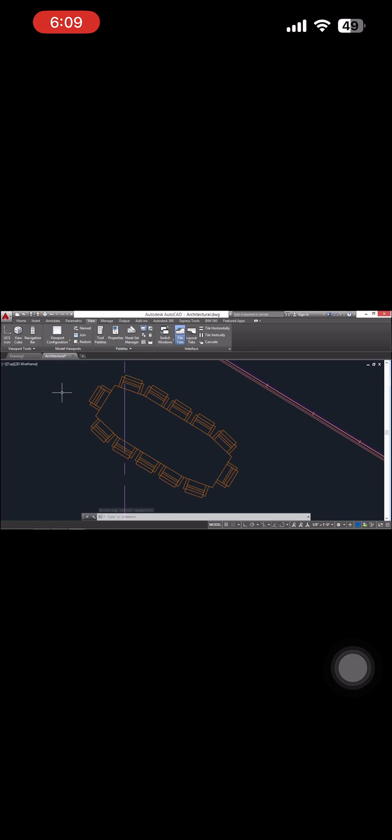Views are like bookmarks in space. In this video, you will save and restore views of key places in a drawing. Open the mechanical sample file from the Chapter 3 folder and zoom in here on the top drawing.

I'd like to save this as a view so that I could jump back here to the top view more efficiently. I'll type V, enter for view, and then click New. I'll give the name top, and I'll just leave everything with the default options. It's a still view. It's the current display. I can optionally save a layer snapshot with this view, and we'll just go ahead and click OK. OK again to close the View Manager.

Now I'd like to zoom extents, and I'll do that by double-clicking the mouse wheel. And then I'll go ahead and pan by dragging the mouse wheel and zoom in down here on the front view. Maybe I'll zoom in a little more, and I want to be more accurate about that. So I'm going to type Z enter for zoom, and I will specify a zoom window by clicking its upper left and lower right corners like this. So now I'm zoomed in tight on the front view.

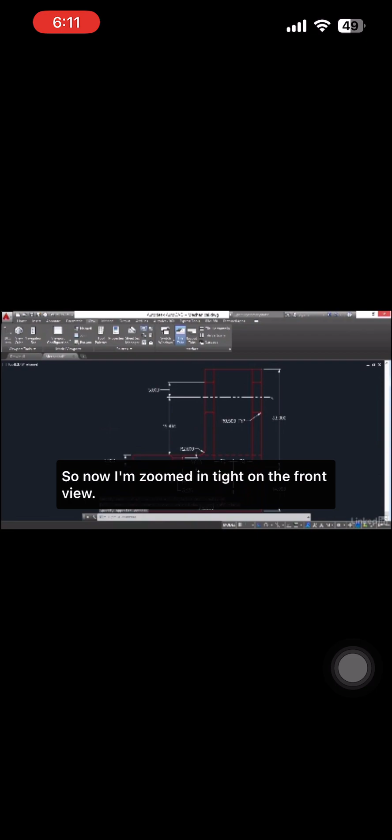So I'll type V enter for view, and I'll go ahead and create a new view called front. OK, and OK again. Now if I want to jump back to the top view, I can do that very easily by typing V enter, and then double click on top, and click OK. So in this way you can jump directly to the view in question.

And of course, saving views becomes more significant in larger, more complex projects where you have a whole architectural campus, for example, or a big engineering drawing with lots of different components. You can name the views and jump right to what you're working on.

You can also use the command line version of the view command without having to see the dialog box, and you can do that by typing -V for the older view command. It doesn't present you with a dialog box. Instead, you have options on the command line. So I'd like to restore a view name. And for this, you have to already know the name. So I do. I'm going to type in front and hit enter. And I go right there.

Notice that it's not case sensitive. So I can just type in front all in lowercase, and that works fine. So let's try that again. I'll type -V, enter. R for restore, enter, and then top, enter. So this is an alternative way of navigating more complex drawings. In this video, you have saved and restored views to quickly jump to specific places in a drawing's model space.

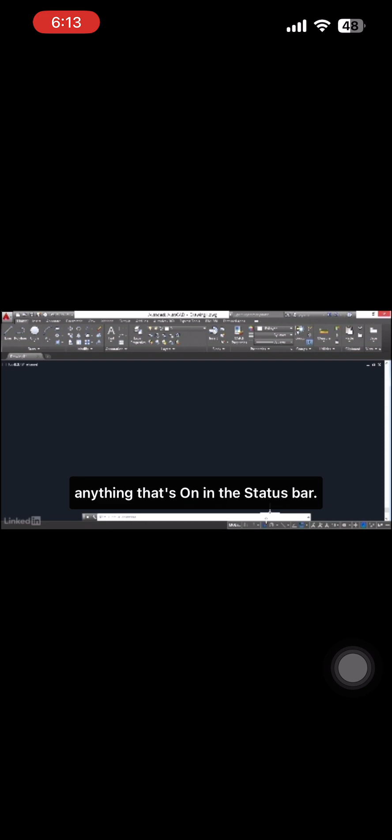In this video, you will draw AutoCAD's most common objects, lines. To begin, let's go ahead and toggle off anything that's on in the status bar. This particular element here can't be turned off. It just tells us about our hardware acceleration. If you want, you can hide that by going to the Customization button here in the corner and turning off Graphics Performance. While you're here, also go ahead and turn on Dynamic Input.

That opens up this control right here. I'd like to turn that off also, so that we can draw lines without distraction. Now go up to the Line tool here on the Draw panel and click. Now let's pay attention to what it says on the command line. It says Specify First Point. That just means click someplace on the screen. I'll click at some arbitrary point, and notice that the cursor appears to be connected to that point now. It's connected with what we call a rubber band line.

The command line now says specify next point or undo. Undo is the option that we have. We can go back and specify the first point again. But we'll just move forward. I'll click another point. And the line command doesn't end. You can keep going, drawing lines.

So I'm going to click another point. Notice now, however, that we have an additional option, close. This is available to us because we've drawn 2 line segments. I'll click that option, and the line command ends. We have now 3 different separate objects here.

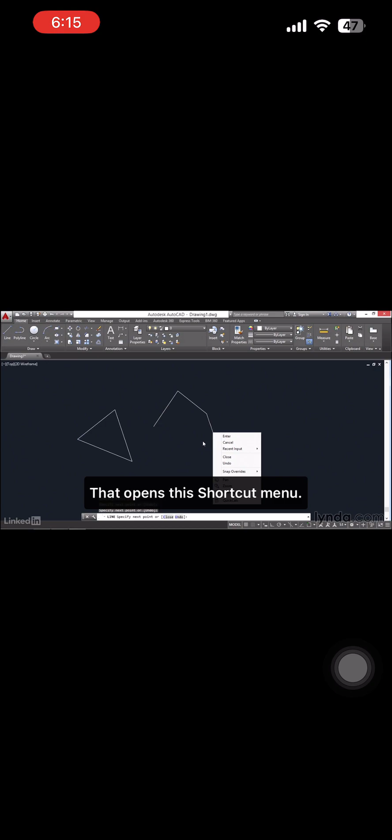And I'd like to repeat the line command. So to do that, I'll press Enter. I'll click a point. Click another point up above, another point, and this time to end the line command, I will right-click. That opens this shortcut menu. You have the options here, Close and Undo, just like you do down below, and you also have Enter, so you can click right here.

I'd like to show you an option that I like when I'm drawing lines. It's called time-sensitive right-click. And this just makes drawing lines a bit more efficient. To access this, we'll go into the Options dialog box. Type OP for Options and press Enter. Go to the User Preferences tab and click this button. To turn on this time-sensitive right-click, simply check this box.

And what this does is it times you when you're right-clicking. If you right-click rather quickly, less than 250 milliseconds, then it will be equivalent to pressing the Enter key. If you take longer than that, it will open the shortcut menu. Apply and close, and OK.

Let's try this out. Draw another line. Click a few points. And let's say we're done. Let's end the line command. Just right-click quickly. And the line command is finished. Now you can repeat the line command by right-clicking again. Draw a few more segments.

Right-click. This time hold the right mouse button down for longer than 250 milliseconds. And what happens is you'll see that shortcut menu. I don't find this shortcut menu to be so useful. I prefer just to access the options down here on the command line. But there are many different ways to do things in AutoCAD, so it's good to know what your options are. When you use time-sensitive right-click, you can actually draw very quickly. You can go line, click, click, click, right-click again, and draw some other lines over here.

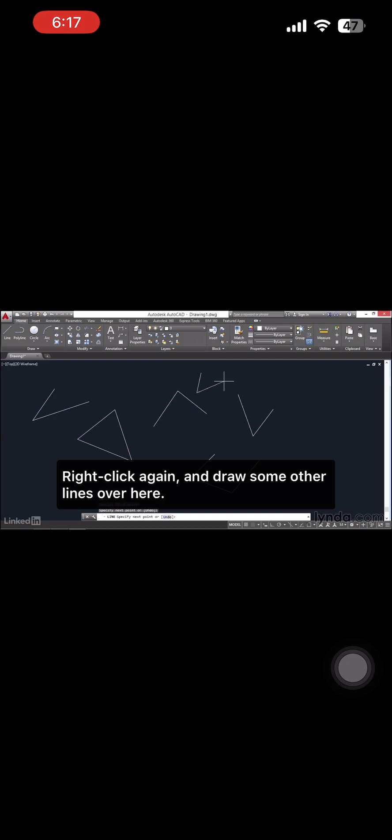Now let's toggle on dynamic input down here on the status bar. I'll pan over so we have some blank area to draw in. Draw another line, and notice what's different. Now we have these interactive elements appearing next to the cursor. The first highlighted number is the X value, and it gets larger when we move to the right, smaller when we move left. The Y value gets larger when we move up. If I click a point, it's going to specify the X and Y coordinates of that point, just like that.

Now we have different controls. We have the length of the line relative to the first point, and we have the angle. 0 degrees is horizontal to the right. 90 degrees is vertically straight up. It's kind of hard to see that there. 90 degrees is straight up. If you go down below, this could be specified as a negative angle, or just moving the cursor down allows you to enter a value down here. So I could do 28 degrees down here, or 28 degrees up here.

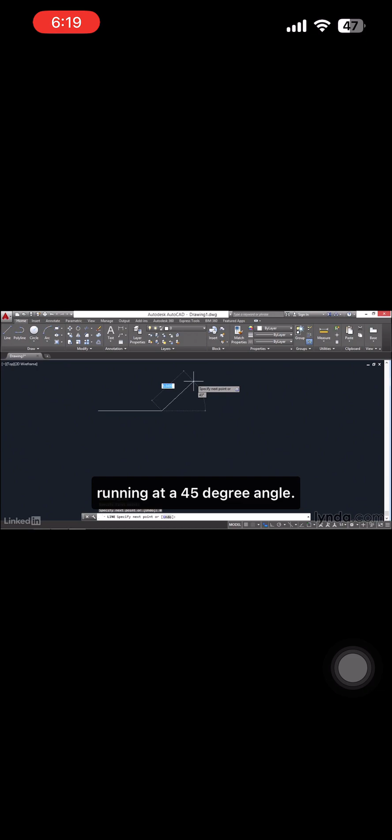Let's say I wanted to draw a line that is 10 units long, that is horizontal. I'll type in 10 and press the Tab key. Now 10 is locked in, you see? There's a padlock symbol there, but I still can specify the angle. So I'll type in 0 and press Enter. So there's a line that's 10 units long, running horizontally. Now let's say I want a line that's 5 units long, running at a 45-degree angle. I'll type 5, Tab, 45, Enter. Now I'll press Enter to end the command.

Another useful aid that you have access to is Ortho, and it's right next to this dynamic input. Let's toggle that on, and it's really useful when you're drawing lines. Type L, Enter for line, and click your first point. This time, notice that the cursor is constrained horizontally or vertically. This will save you a bit of time because you don't have to type in the angle.

I can type in 5, Enter, for a horizontal line. I can move the cursor up and type 5 here, 5, Enter. You can override Ortho by typing in an angle. So I can press Tab, go to the angle, and type in 45, Enter.

If you want to specify the angle and the distance, you can do that, but you just have to use the Tab key. You can do it in either order. I can press Tab, say I want this at a 0-degree angle. I'll press Tab, and then I'll type 3 and press Enter. So that's how you can specify your lines pretty easily with Ortho.

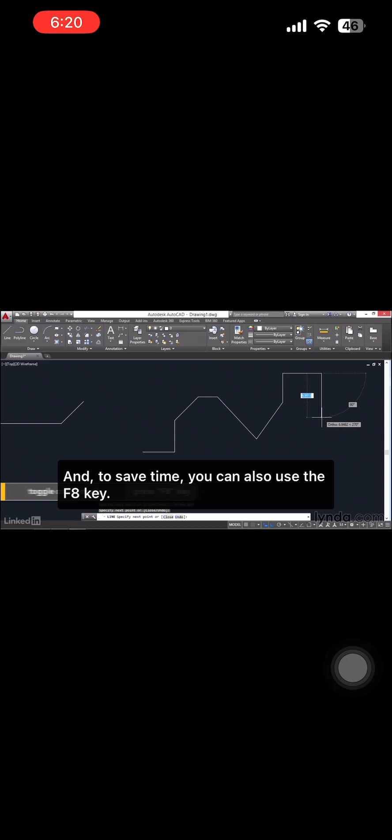Now Ortho can be toggled on and off at any time while you're drawing lines. So I can draw some arbitrary length lines here. I'll turn Ortho back on, draw another few lines with Ortho, and to save time, you can also use the F8 key. So I'll press F8. Then I have the freedom to specify the angle. I'll press F8 again. That locks me into horizontal or vertical. And so in this way, you can draw in lines more efficiently.

So in this video, we covered the ins and outs of drawing lines. And we also took a look at dynamic input and ortho modes.

In this video, you will draw circles using a variety of different creation options. Let's begin with the command line interface only, so that we can focus on the command prompts. To do that, let's toggle off dynamic input. Then go ahead and type circle, or at least a portion of the word, and autocomplete will fill in the other letters. Then hit enter.

The command line says specify center point for circle, and that's what we're going to do. It also says or, and it has a bunch of cryptic options that we'll get to later. But the first thing is the circle needs a center. So we can specify that by clicking a point on screen. Once we do that, the command moves on to the next step. It says specify radius of circle. We'll do that also interactively.

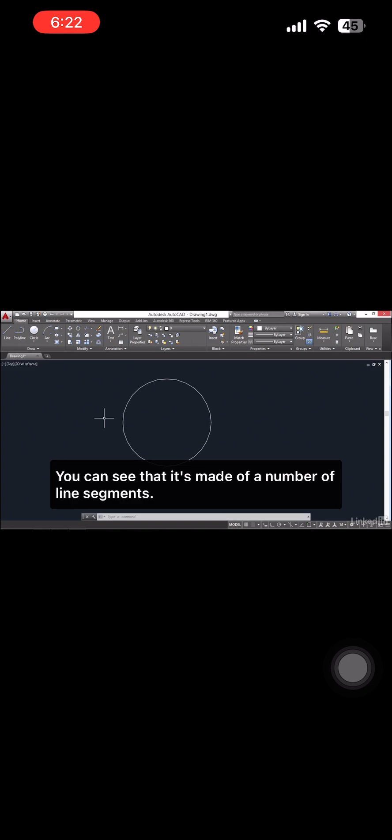Now this circle appears blocky. You can see that it's made of a number of line segments, and this highlights what's really happening behind the scenes, if you will, in AutoCAD. AutoCAD has to remember the center point of the circle and its radius, and that's all it really needs mathematically speaking. However, the representation of the circle can be approximated by a number of line segments.

Now, geometrically, a circle is an infinite number of points equidistant from a center, but in the computer, it's going to have to approximate that with a number of straight line segments. And if we have enough, it will appear nice and smooth. Let's increase the smoothness by going into the options. Type OP, enter, and then we're going to increase this display resolution to the maximum value. In this case, it's 20,000. Boost that up, and then click OK.

So now the circle appears nice and smooth. It's still composed of little line segments, 20,000 in fact. It used to be that this parameter was more important when computers were slower, but now it's really not a problem to display circles in this way. So I recommend that you boost up that parameter all the way to the maximum.

Now let's create a few more circles. Pan over a bit, and we'll draw another circle. Type CI, enter. And this time we'll create a circle with a given size using a number. So we'll specify a center point at some arbitrary location on screen. Just click a point to specify that center. But now we can specify the radius of the circle using a number. I'll just type in 4, enter.

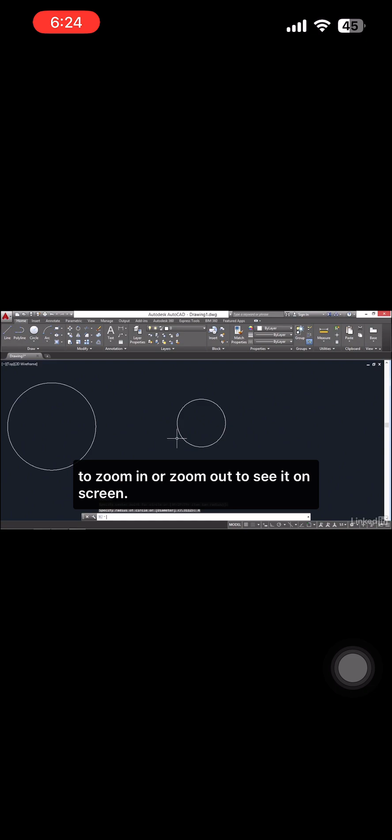Now I'll pan over again, and this time I'd like to ask you just to draw a few lines just like this. It doesn't matter how long they are or exactly what angle they are, but we just want to have 3 lines that sort of imply a kind of a triangle. And what we're going to do is fit a circle inside there.

Now, we don't know where the center of that circle would be, but we can get AutoCAD to figure that out for us using one of its options. So we just go up here to the circle command and open it up, and then use this last option, 3 tangents.

Now what happens is it simply executes the circle command, as you can see down on the command line, and it says right here 3P. So it executed this option. We could have done that manually, but this is just automating that a little bit by typing those things in for you. And it says specify first point on circle, tangent to.

And watch what happens if I move the cursor over here. A green symbol appears called a deferred tangent. What I need to do is click anywhere on that line. As long as that green symbol appears, I'm good. Just click right there. And AutoCAD knows that I'm trying to create a circle tangent to that line. Tangent means that the circle will pass through that line at only one point.

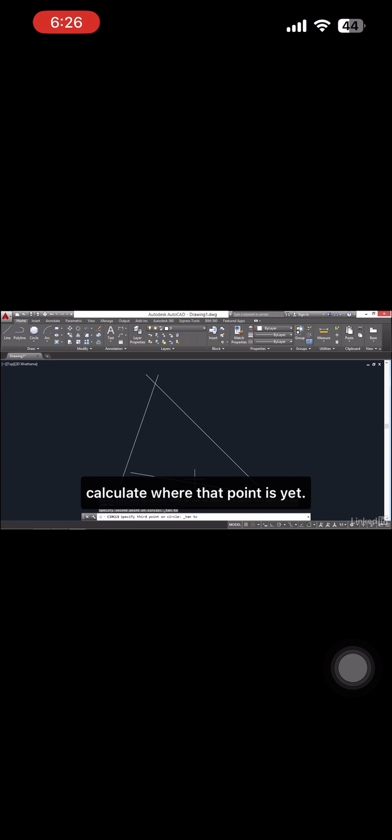Now, I'm going to go down here and make another deferred tangent. It's deferred because AutoCAD can't calculate where that point is yet. You have to specify all 3 lines, and then it will be able to calculate all 3 tangents. I need to come up here and click this line, and the circle is created. So the options are there because there are different geometric conditions that you have to work with. When you want circles to fit inside of certain areas, you need to choose the right option for the job.

Let's try drawing another circle using the dynamic prompt. So let's toggle this mode on. And this time I'll type circle, enter, and we have some information there attached to the cursor. It says specify center point for circle or down arrow. I'll press the down arrow on the keyboard and it drops down a menu containing the same options that you see on the command line: 3-point, 2-point, and tangent radius. But here I can select them using the cursor. I'll do a 3-point circle, so I'll click right here.

Now it says specify first point on circle. I'm just going to approximate this intersection point by eyeballing it. I'll just click right about there. And then second point on circle is going to be, I don't know, right about here where this line would intersect with that one. And then the third point is going to be over here about where those two would intersect. Now I'm intentionally estimating this, but there's a better way to do this using object snaps, and we'll cover that in a future video.

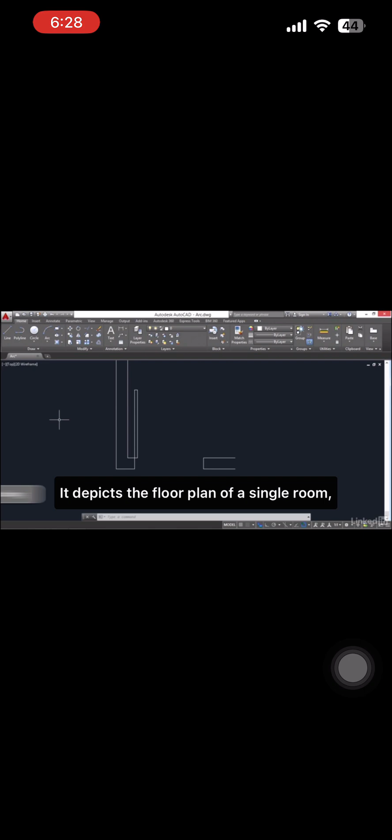In this video, you will draw some arcs and explore some of the creation options available to you. Open the arc sample file in the Chapter 4 folder. It depicts the floor plan of a single room having a door and an opening. I'd like to create an arc in this area here that represents the way that the door closes. To do that, I will use one of the many options here in the arc flyout.

In this particular situation, we have an arc which has a center point which is coincident with the door's hinge. So we should choose a creation method that accounts for a center. These 3 have center in their names, as do these 3. Now, the only difference between, say, this one, center, start, end, and this one, start, center, end, is simply the sequence of events. Let's try this option here, start, center, end.

So I'm going to specify the start point of the arc right here. Now I'm using Object Snap to be precise, and I'll talk more about that later in a subsequent video. But suffice it to say, all you have to do is click here, and the arc will be precisely connected to that endpoint. Now the prompt says, specify center point of arc. So the center of this door swing is going to be the door hinge, and that's going to be right here. So click.

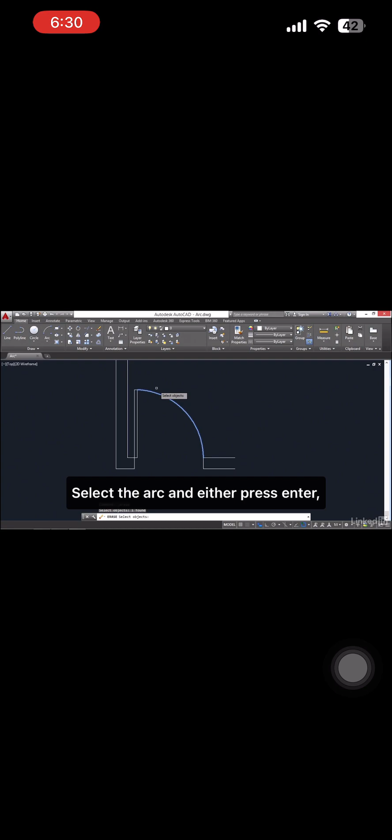And then you can see what's happening. The prompt has moved on, and now it says specify endpoint of arc. And I can click right here to specify that and end the command. So we've successfully created a door swing. Now what happens if you did this in a different order? Let's see what happens. Use the Erase tool here on the Modify panel. Select the arc and either press Enter, press the space bar, or right-click to complete the command.

Now let's go ahead and draw the same type of arc, start, center, end. But this time, let's say that we start up here. Start. The center will be in the same location, and the end point will be over here. But look at the problem. The default method of creating arcs is counterclockwise, so the arc swings around that way.

Well, that's kind of a problem because we didn't anticipate this when we were creating this arc. But that's okay, because if you read the command line, it says specify end point of arc, but then it goes on to say hold Control to switch direction. So that's what we're going to do. Hold down the Control key, keep holding it, and move the cursor a little bit to have it update. Then click in this location to specify the endpoint, and the arc command is complete.

You can also draw arcs more or less freehand by specifying 3 points. That's this first option. Let's try that off to the side over here. I'll pan over. For this, we just need to click 3 points: 1, 2, 3. And the arc is complete.

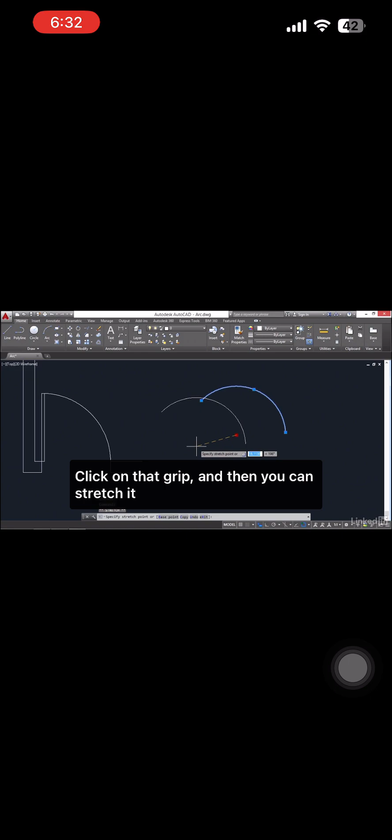You can edit the curvature of that arc after it's created by selecting the object. That enables the object's grips. There's a grip here for the center point. When you position the cursor over it, it becomes a hot grip and turns red. Click on that grip, and then you can stretch it or move it in space. I'll click again to put it back down. I can click any one of these grips and reposition it. This allows me to really control the curvature of this arc.

But remember, arcs are really just parts of circles, so you can't create really complex curvature with an arc, but you could connect arcs together to create more interesting shapes. So for example, let's say I draw a line over here, like that, and then I'll follow that up with this last option, continue. This will create an arc tangent to the last line or arc drawn. So you see what's happening here? The arc maintains tangency with that line, so it has a nice curve joining in with that line.

Now if I do that again, the next arc that I draw remains tangent to the previous arc. And so in this way I can make nice smooth shapes.

Incidentally, you can use the blend command to join arcs which aren't connected. Let's try that just because I'm mentioning it. Blend, and then I'll select this arc, and it will try to blend there. It didn't do a very good job, but if you zoom in, you'll see that it actually is curved. But because this is such a sharp turn, it doesn't look so great.

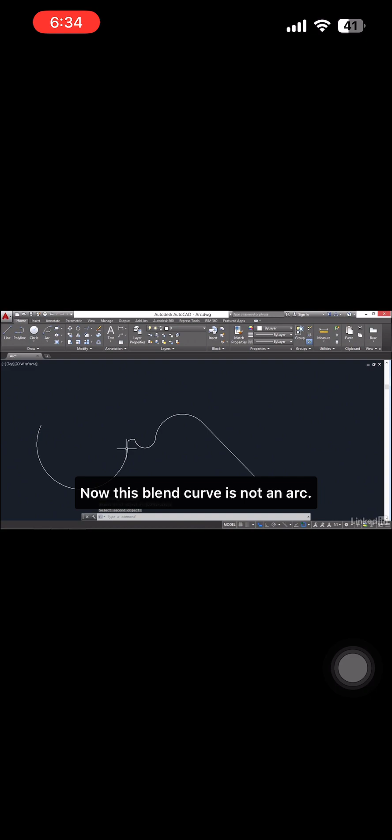I'm going to erase that. And this time, I'm going to move this one over a little bit like this. Let's see what kind of a blend we get now. Blend, and I'll select these two objects. And we get a better curve. Now this blend curve is not an arc, it's a spline, so it has more complex curvature, as you can see there.

Now another way you can create an arc is by trimming a circle. So I'm just going to go ahead and erase this arc, and I'll show you yet another way that you can arrive at that nice door swing. You could create a circle which is centered here and continues to this point. Then you could trim the circle and thereby convert it into an arc. Again, you'll learn more about trim in a subsequent video, but I thought I would just show you this method.

Up here, you'll find a flyout that contains trim and extend. Let's use trim. Trim works by selecting objects which act as cutting planes. So I'm going to select the door and this line, and then press Enter to move on to the next step. Now it says Select Object to Trim. I will click this part of the arc to trim it away. Now press Enter to end the command.

So we've trimmed a circle and converted it into an arc. If I select this arc, you'll see its grips appear, and its center point is located right there perfectly on the hinge of the door. Press Escape to deselect the object grips. So there you have it, many different ways of creating arcs, as well as trimming circles to create arcs and blending between curves.

In this video, you'll draw ellipses and elliptical arcs. The term ellipse refers to an oval shape. Open the ellipse sample file from the Chapter 4 folder.

This file contains 2 lines and 2 point objects. Incidentally, you can create point objects with the point command. Just type PO, enter, and click a point to create a point. There are no options—it's a very simple command. It makes a placeholder that remains as a single pixel. No matter how much you zoom in on it, it doesn't get any bigger.

I've used these 2 points up here so that you can snap ellipses to them. I'm going to delete this new point object by selecting it and pressing the delete key. So let's type in ellipse. I type ELL and autocomplete does the rest.

I'll press enter, and now the command prompt says specify axis endpoint. An ellipse is defined by 2 cross axes—there's a major axis and a minor axis. In this case, I'd like to draw an ellipse so that the major axis goes across horizontally and the minor axis runs vertically. So the axis endpoint would be right here. A green box is showing up because I turned on endpoint object snap down here. This is on.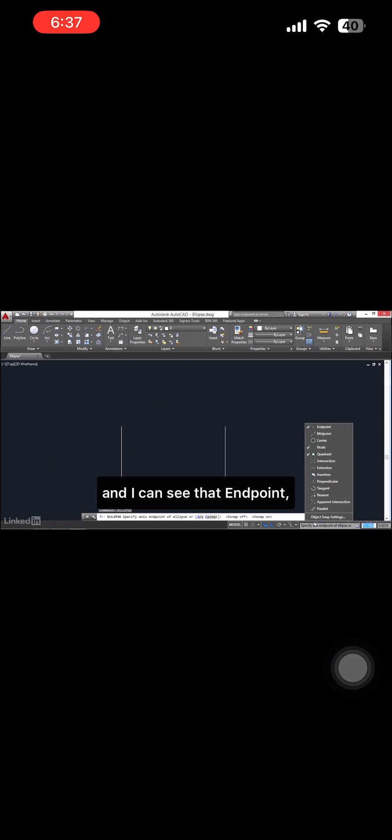You can see that endpoint, node, and quadrant snaps are running. This will allow me to snap the ellipse to this geometry in the sample file. So we're going to specify the axis endpoint right here by clicking. Now it says specify other endpoint of axis—that will be way over here on this line. Now it says specify distance to other axis. I'll click right here and the command is completed.

Let's try that in a different way. Click on the ellipse and press delete. This time, let's try the center method. It asks us for the center first. Click here—the point has a node snap. And then we'll specify the endpoint of the axis over here.

Now this is actually the half axis. The distance from the center to the end of the major axis is half of the axis, and similarly the minor axis is the distance from the center point to the point you click. This is all very obvious because it's shown to you with the cursor—you can see what you're going to get before you get it. The elliptical arc works in a similar way—it's simply an ellipse that's been trimmed so that it's just a part of an ellipse.

So here, we're going to specify the axis endpoint or the center. I'll choose the center option by pressing the down arrow and choosing center, and I'll click right here. Then again, the endpoint of the axis—I can go here or here, it doesn't matter which one. I'll click right here this time.

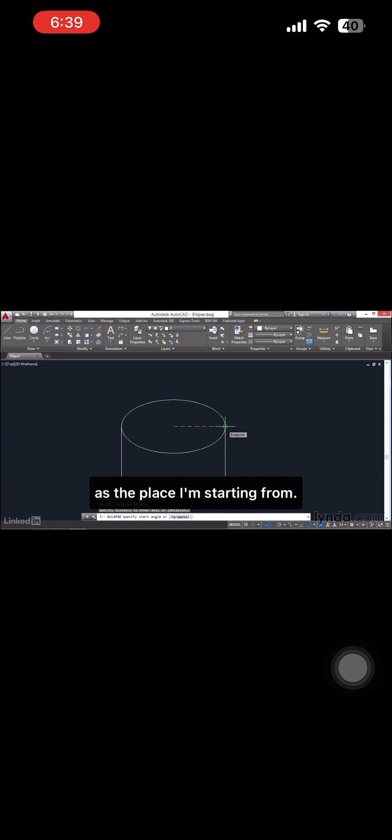I'll turn off ortho by pressing F8, and you can see that we have the ability to draw an ellipse all the way around here as far as we want. I'll press F8 again, and that will constrain the angle from 90 degrees to 180 degrees to 270 degrees. In this case, I just want to go over here, so I'll click anywhere on this line—it doesn't matter where, I don't have to snap to this endpoint. I can just click right here, and the command is done.

So there you have it, several different ways of creating ellipses and elliptical arcs. In the next video, you'll draw more complex curves with the spline command.

Splines are used to create complex curves. In this video, you will use 2 different methods to shape splines. Open the map sample file from the Chapter 4 folder. Here you'll find a map of Maui, Hawaii. It's attached as an image file. If you zoom in, you'll see the JPEG compression artifacts here.

Our task is to trace some of the outline of the island with splines. This way we could create a vector representation of the island for use as a project site plan. Say the project is located at this dot, and we'd like to show the outline of the island to give the viewer of the drawing a sense of context. I'm going to zoom in here on this area where we have a lot of curvature.

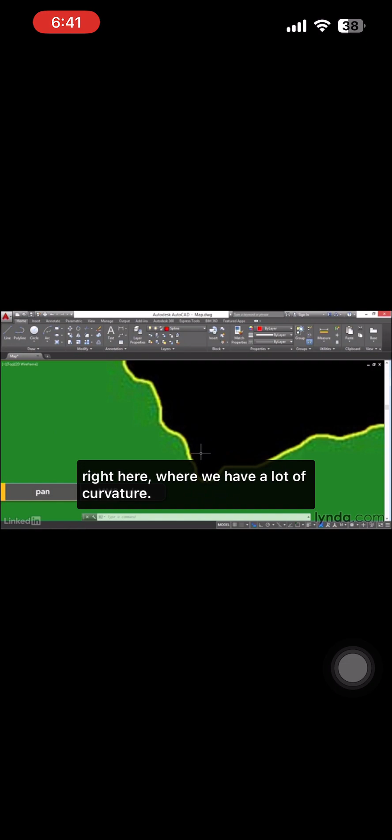Let's try drawing our first spline. Click the Draw slide out, and you'll see two spline tools located here: Spline Fit and Spline CV. CV stands for Control Vertex. Let's start with the Fit method first. Click this button, and it says Specify First Point.

I'm just going to click a point somewhere along this path. Don't worry if you don't find the exact same place on the island's coast. It really doesn't matter, the point here is just to trace some of the island to get a feeling for the spline tool. Enter the next point. I'll click here and keep going. Each time I click, I'm adding a new fit point that lies on the spline curve.

You don't have to get it perfect the first time around, you can just sort of estimate. If you zoom out some more, you'll get a better view of the whole island, and you can just go ahead and click some points. When you're ready, just click Enter to finish the command. There's no need to trace the entire island unless you just want the practice.

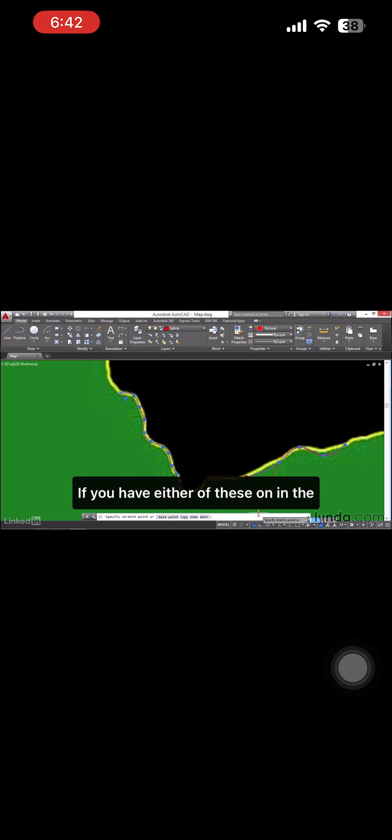I'm going to zoom in here and show you how you can edit the shape of the spline after it's been created. Simply click on the spline to turn on its grips. Then you can click on a grip and stretch it. Now, things that often get in the way of this are ortho or polar modes. If you have either of these on in the status bar, you can toggle them off. Also, you should turn off any object snaps that are running, because you don't want this to snap to something. You just want to change the shape of the spline by moving these around.

Let's say I want to have the curve come in a little bit more here. It's hard to do that because I don't have enough control over it. What I can do in this situation is position the cursor over this grip, and then this menu appears. I'll choose Add Fit Point, and I'll click right here, and it creates a new grip, or fit point as it's called. I'll add another one, and in this way you can add additional curvature.

You can also remove fit points that you don't think are necessary. Maybe this one we can get rid of. No, that kind of messed up the shape. Let's go back and add a new one right about here. So it's pretty straightforward. I'm going to press Escape to deselect the spline.

Another thing you can do is turn on line weight here. And if you don't see this, you can go to the Customization button and toggle on line weight from the menu. Line weight is going to make the spline fatter so that it looks a little bit more forgiving at a larger scale. If you zoom out here, it looks really good from this vantage point. Of course, the closer in you get, the more discrepancy there's going to be between the spline and the coastline.

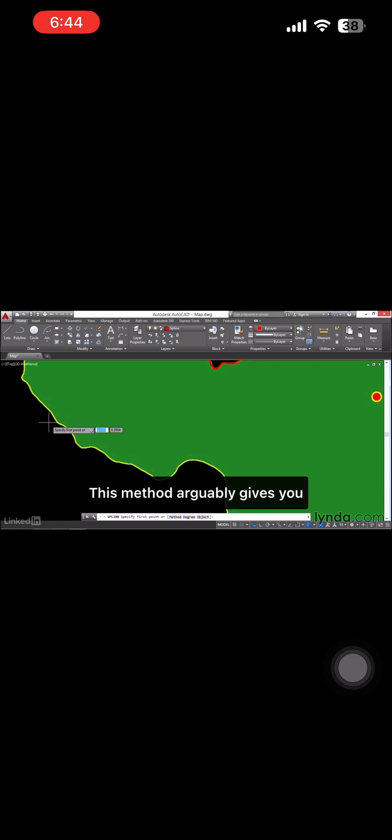Now let's go over here, maybe on the other side of the island, and we'll draw another type of spline object. Click the Draw slide out and create a Spline CV. Now this method arguably gives you more control over the shape of the spline, but it's very different. You don't specify the points on the spline except for the first and last points. I'll click right here for the first point, and then the next point isn't necessarily going to be on the curve that I'm trying to trace.

Maybe it will be over here, and then the next point down here, and so on. This will become clear in a moment when I end this and edit the spline. I'm just going to draw a little bit more though first. Okay, I'm going to stop here and press Enter to end the command.

Now when I select the spline object, you'll see this lattice appear between the control vertices, or CVs as they're known. So these points aren't necessarily on the spline. As I said, the first and last points are, but all the other ones can be outside of the spline. This gives you the ability to affect the curvature with a little bit more finesse.

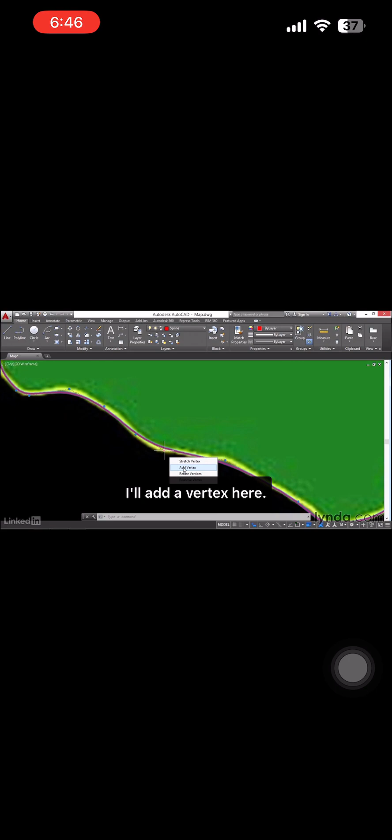And similar to the fit point method, you can add or remove these points from the menu. I'll add a vertex here, and then I'll just go ahead and move these vertices around until it matches the coastline a little bit better.

So this should give you a little bit of practice for tracing an image. Also, you can use this grip here, this special triangular grip has a menu associated with it. If you click it, you can then convert between the two types. If I convert this to a fit spline, the shape remains the same, but now we have points that lie on the curve.

And similarly, over here, we can select this object, and it has a special grip menu we can use to convert it to a control vertices method, and then we can use these to sculpt the shape of the spline. So there you have it, several different ways of shaping splines to match the curvature of a map attached as an image.

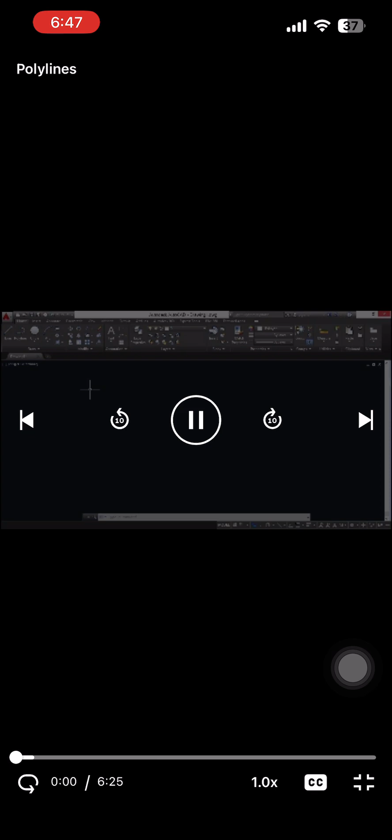I'm going to discuss polylines in this video. As the name suggests, polylines are many segmented lines that behave as single objects. Before we create a polyline, let's start by drawing a few line segments with the line command. Click line, and simply click a few points on screen, like so. Right-click to end the line command.

Now let's follow this up with the polyline command. It works very much the same way. I can specify points, just like this. You might notice that there are more options on the command line, and we'll get to some of those in due course. I'll right-click to end the command.

So visually they look very much the same, but they're handled a bit differently. This is a single object. You can see that because the whole object highlights. These are individual line segments which are separate objects. Let's move. So click the Move tool in the Modify panel and select this line segment and this one.

Press Enter to exit Select Objects mode, and then you'll need to specify a base point, which can be anywhere on the screen. This will be the point from which we are starting the move. And then we'll specify the second point. This is where we're going to put these objects. I'll click over here. So basically in the move command, we had to specify a point A and a point B to move the objects.

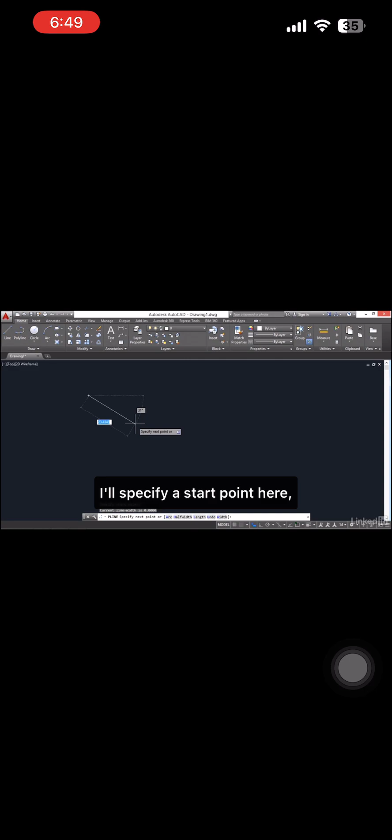I'm going to pan down here so we have a blank slate. Then I'll draw another polyline. I'll specify a start point here. And then for the next point, I'll just click an arbitrary point like that. And for the next step, I will use one of the options. I'll press the down arrow and choose arc. You can see what's happening here. I have an arc that I can create tangent to the line that I've drawn. I'll click a point and go on to the next step.

I can continue drawing arcs if I wish, or I can switch back to drawing lines with the line option. I'll come down here and click line to switch back into that mode. Now, when I do that, I have no tangency anymore to that arc. So I could kind of eyeball it, but that's not really going to be tangent. I'm just going to click over here, and there'll be a corner right up there.

I'll go around and click a few more lines. Then I'll switch into arc mode, and I'll click close, and that will close the polyline with an arc. So this is still one object. If you click on the object after you've completed the polyline command, you can then edit its shape using these vertices. I can move this around, and everything connected to that vertex is going to transform.

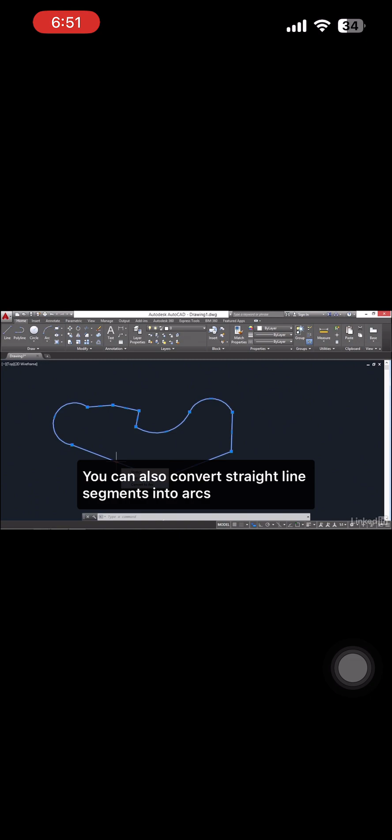Alternatively, I can use this middle grip and I can add a vertex. I can do that as many times as I need to shape the polyline. You can also convert straight line segments into arcs, like this. Or you can go the other way. You can take an existing arc and convert it into a line. I'll press Escape to deselect.

Now, polylines can also have width. Let's see how that looks next. Do polyline again. Specify a start point over here. And let's use the width option. I'll press the down arrow and select that here. It says specify starting width. I'll type 0.2, enter. And now it says specify ending width. I'll type 1, enter. So what's happening here is I'm creating some thickness on this line, and it starts from a narrow thickness and it ramps up to a wider thickness.

If I click another point, it's going to continue with that ending thickness, in this case, 1 unit. I'll press enter to end the command, and those gaps between the segments are filled in. This is still a single polyline, and its vertices run right down the middle of that shape.

Now, I want to draw another polyline, but if I do that, you'll see that the width is still in there. What if I want to draw a polyline with no width? Well, for that, I need to reset the values back to 0. So I'll type PL, which is short for polyline, or P-line as it's known. I'll specify a start point, and then click width, 0, enter, and then 0 again, enter.

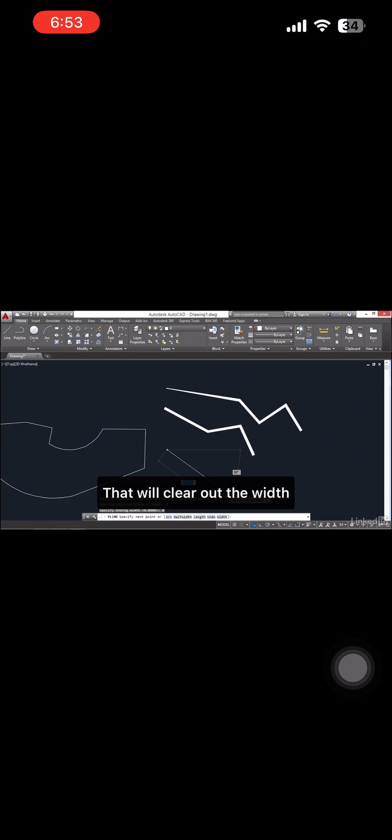That will clear out the width so that I can draw polylines that have the minimum thickness, which is a single pixel. No matter how much I zoom in on that polyline, it will remain with a single pixel width because it's mathematically defined as the points that I've clicked with lines connecting them. So in this video, you've learned many different ways you can use polylines to create objects that are all connected, that may have straight and or arced segments with optional width factors.

This video is about rectangles and polygons, two specialized polyline tools. You can find both of them on this flyout. We'll begin with the rectangle. As the icon suggests, rectangles are made by clicking two opposite corner points. I'll do that here. Very straightforward.

I'll select the rectangle, and you'll see that it's actually a polyline. That means that we have access to its grips, just as if we had drawn this using the P-line command. We can then reposition these vertices if we want, or convert straight lines into arcs, and so on. So I'll press Escape to deselect.

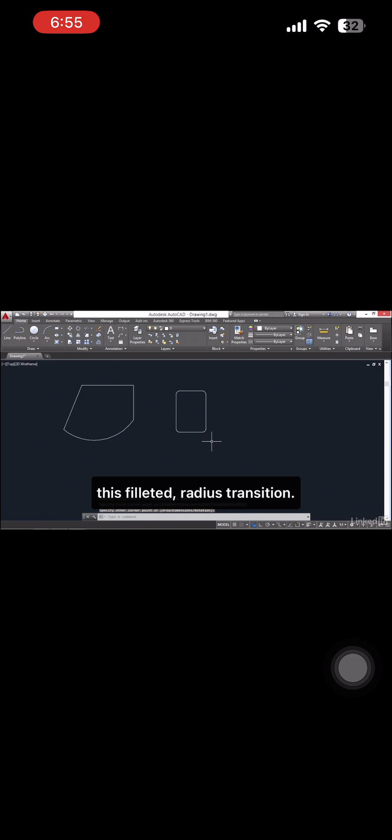And you'll see what's happening here. We're creating a rounded rectangle. What used to be a corner is now this filleted radiused transition. This option is sticky. That means it persists. So if I create another rectangle, which I'll do by pressing the space bar, it's going to have that same fillet radius built in.

If I want to set that back to get rid of it, I have to set the fillet radius to 0. So I'll do that next. Press the space bar and the down arrow, choose fillet, type 0, enter. And now just to show you that it's cleared out, I'll draw another rectangle. Let's try the chamfer option next.

It requires the input of two different distances. Let's try 1 and 1 again, so that they're equidistant. Now, draw the rectangle. So what we have here is a beveled edge. The two distances are the vertical distance and the horizontal distance. I set them equal so that we would get a 45-degree bevel.

This is also sticky, so if I draw another rectangle, it's going to have that setting on. So let's just go back and reset that. I'll go to chamfer and set the two distances to 0 and 0.

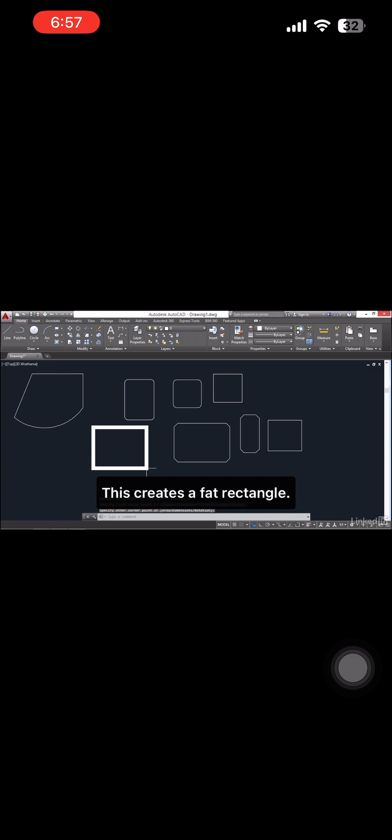Just like the p-line command, you can create rectangles that have width. I'll use the width option, and I'll set the width to 1. This creates a fat rectangle. And again, the value is sticky. I need to go back and reset width to 0 if I want to clear that out.

Let's try drawing some polygons next. Polygons have equal length sides, so you can create things like triangles, squares, pentagons, hexagons, and so on. Let's try drawing a square. The number of sides is 4. I'll press Enter to accept that as the default. Now it says specify center of polygon. I'll just click a point.

And then you have an option whether you want that to be inscribed within a circle or circumscribed about the circle. That means outside of it. I'll take the default inscribed in circle by pressing Enter. Now you can see what's happening. I'm drawing this square, and there's an imaginary circle that is surrounding it. And so we're specifying the radius of that circle right now.

You can use ortho by pressing F8 to make sure that this is locked into a vertical orientation. If you go over here, you can do that horizontally, but the result is the same. You're creating a sort of diamond shape. Let's try that again with 4 sides, but this time I'll press the down arrow and use this single option called edge. This allows us to specify the edge length, and that's done by clicking 2 points. I'll click the first endpoint of the